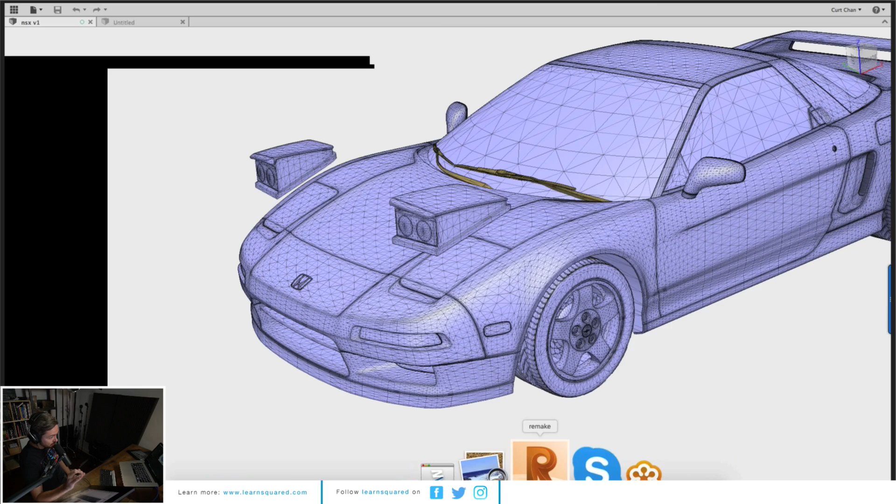Are the dimensions and everything fine, like to the T? Just scale? I don't know. That's what I'm saying—like if you have a properly designed vehicle to the blueprint, versus someone just working with references and trying to eyeball it.

Yeah, because that might be a problematic thing, especially if you want to build something for manufacturing. You're going to build something that looks cool on the model, then you print it out, and it's like 3 inches. I'm like, hey, what the hell?

Yeah, no, that's true. I have a question in regards to that, Curtis. What would be a general approach? I can assume car manufacturers would have CAD files and everything, but for a regular consumer, it's not available. So do you think, as a consumer who wants to do it for fun and play with it, would you go with scanning, or would you try to find out if there are CAD files for specific parts you want to replace?

Yep, so I think the first thing is, one, get the CAD file, because a lot of these manufacturers will have it. But two, a big thing I'm starting to see a lot more, and that we're starting to work a lot more with, is some of these partners that do a lot of 3D scanning. This is a big focus for us going into this year specifically.

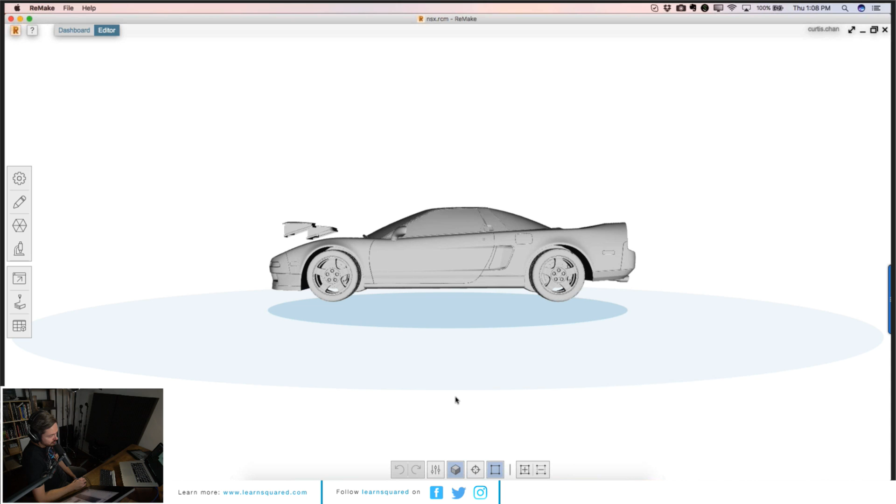So at a high level, when you look at Fusion, there's a couple things I'll talk about today, from our workspaces: model, patch, render, animation, simulation, cam, drawings, and then this other one we just put in that's available to certain people out there, sheet metal, and design, if that's of interest to anybody. But we do have a preview of that.

The other thing is, if you drop down and turn off 'Do Not Capture Design History,' say continue, this now opens up another workspace called Mesh. We've taken pieces of Mesh Mixer and put it into Fusion. So now you can take your models, reduce the mesh, change the mesh, repair the bad geometry—do all these things now inside of Fusion, rather than using Mesh Mixer or Remake.

Remake comes into play at a different level. The goal is to eventually have a lot of these functionalities incorporated into Fusion, because long story short, Fusion is the future of Autodesk in regards to manufacturing. It's considered a platform where everything else will plug into Fusion at the end of the day—just like what Adobe is doing, what Microsoft is doing. This is our platform for manufacturing.

So I think this is going to be great, Ash, for you to dive in and mess around with. Instead of going to Mesh Mixer, just bring parts of the files in here. Let's remesh it, let's reduce it, let's fix bad geometry. You can do some of that stuff here.

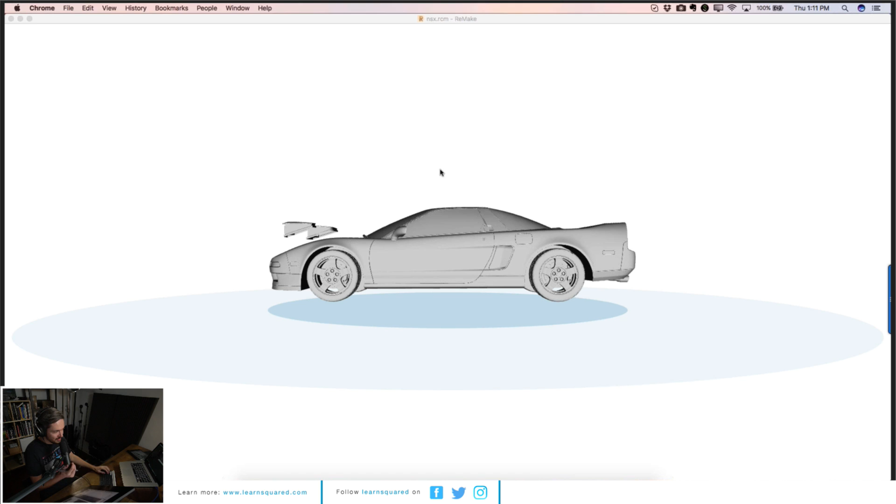Show me, Curtis, show it to me. So from an avenue of relationship it would be great too. Yeah, I'd love to talk with him. These guys are cool, taking old school stuff, scanning it, remanufacturing it, and he's paying a lot of money to have the scans done.

You could just do it with like a photograph, right? It comes back. He was doing it with sand while he was on vacation, took a bunch of pictures of sand. Yeah, he was showing me.

I've seen the handmade Broncos and they are so expensive. They run anywhere between minimum, I think, like 150 to 240. But they're immaculate, it's beautiful, kind of like a Singer Porsche. Singer Porsches are really expensive too, like $250,000. I think Joe Rogan had him on the podcast. He was on Jay Leno's Garage too.

He's now working on a special project where he scans an entire car, scanning bumpers, re-engineering it inside of Fusion. This is where we've paired him up with one of our product managers on the remake side of things, figuring out how do we work better with scan data, because we just don't do it fantastic.

We do it on like, let's just scan this stupid knob. But as you talked about, with this car, I want to take it and break it up and work with it and do cool things with it. So it's not there yet. Customers like yourself, customers like Icon, this is the envelope of where we're trying to push, figuring out how do we take people who master mesh data, master working with OBJ in the engineering world, when people are like, why would I even use something like this?

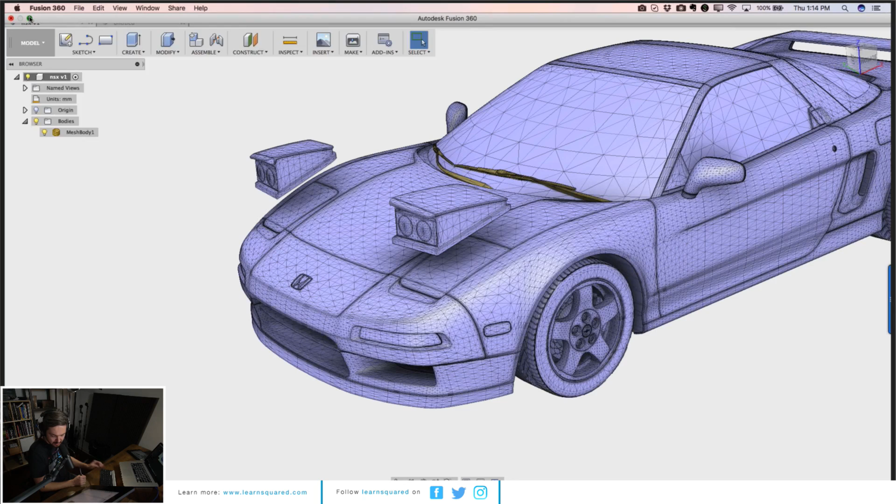Oh, that guy? Yeah, he's doing a lot of pew-pews.

Basically, Fume is like this—it's basically bringing Instagram to your desktop. That's cool. Instead of you doing all the posts and whatever you want to do, you can do it all integrated right here. But I think it's 3D.

The nice thing is, because I know you guys are using—I don't even know how to spell it—3D Picasso. Let's do a search right here. Of course, when I want to show it, it doesn't work.

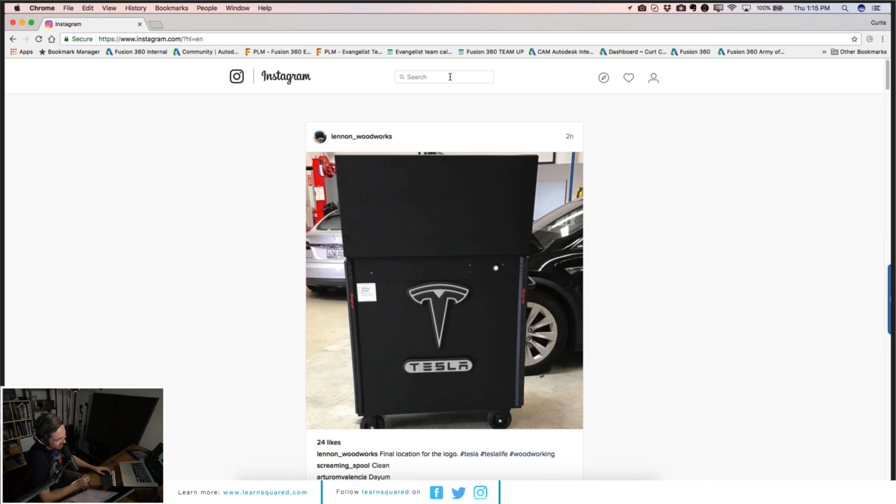Yeah, what are you trying to sell here? Nothing, actually nothing now. 3D Picasso. There he is, so, Sergey.

The only reason why I'm giving it a push is because, like how you guys talked about all this, everything is done in Fusion. Like all his prop stuff, all his guns, everything is done in Fusion. So he's doing some hobbit pipe. But it's nice to know that. Damn, pew pew, fucking killing it. Literally, he's killing it, dude.

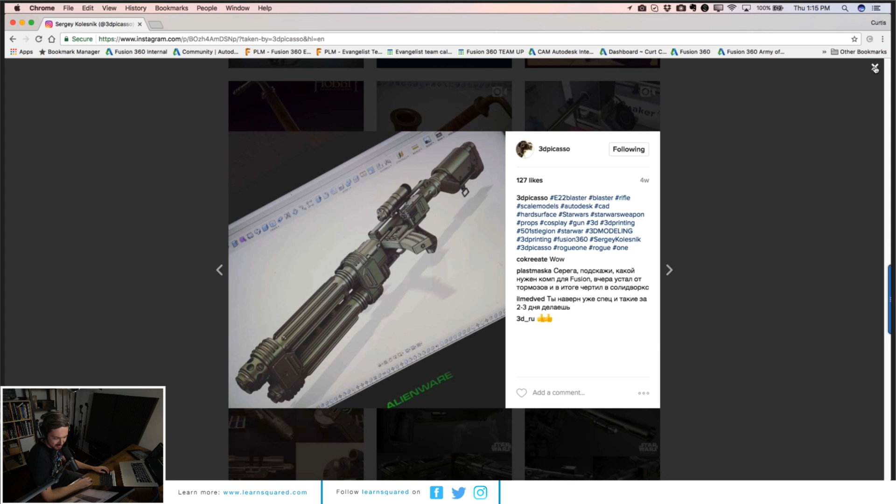Sure, so anyhow, get it. Maybe Momo, you can help us with that. We can get him on the stream and have him share some hotness with us all. Yeah, because really, that's what I want to hopefully do is bridge the gap.

Like whether it's taking photos of my car and then bringing that scan data in and using that as a base surface to put mesh onto. That's really what I want—I want to be able to rapid prototype and do whatever I want in here. And that's the biggest gap, because if it doesn't have it, I've got to go back into the polygonal model and wait until it's ready.

So yeah, I think Papa needs it, Curtis. Papa needs it. I think, even I think will be awesome too, is Natasha being on and showcasing—hey, taking photos of your car, putting it together, stitching it all together, and then creating a 3D model from it that you can actually use to reverse engineer. So down with that, yeah, let's do that, dude.

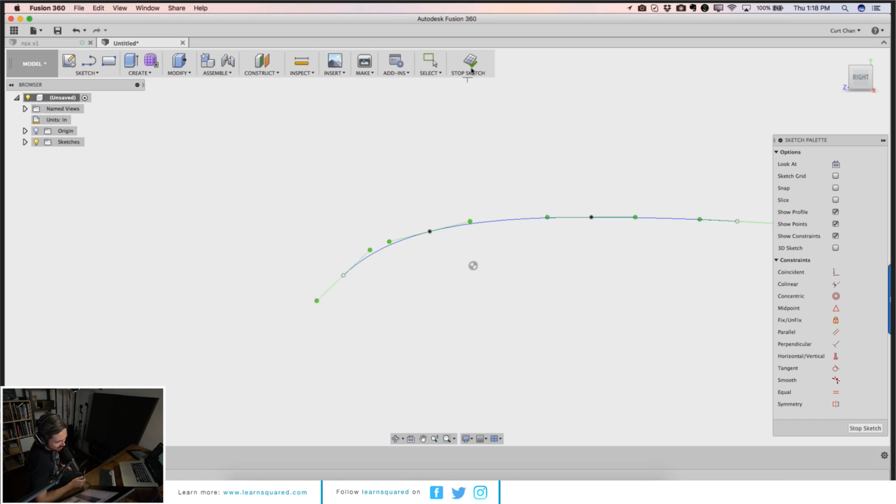But okay, so it's not here yet, and I blame Curtis solely for the lack of its ability. It's because the shortcuts are missing. So Curtis, you go to these meetings and just go like no. In reality, Curtis is just there on the meeting and one of the developers says, hey, I had this brilliant idea to add shortcuts, and he's like, no.

Dude, oh man, I won't get into it, but it's just like, I forgot the other day because I spent so much time on the CAM side that I'm just like, so we would rather split the triad from move and translate off than fix this bug. Okay. So nobody wants that fixed. Okay, and that was more important.

It's just, and you can't blame anybody, right? It's end of the day. Blame him. I know, it's so easy. I do. I'm lying to myself right now. I'm lying to myself. Joking. No, but it is messing around. I'm sure you guys are plenty busy. Well, we're just totally joking around.

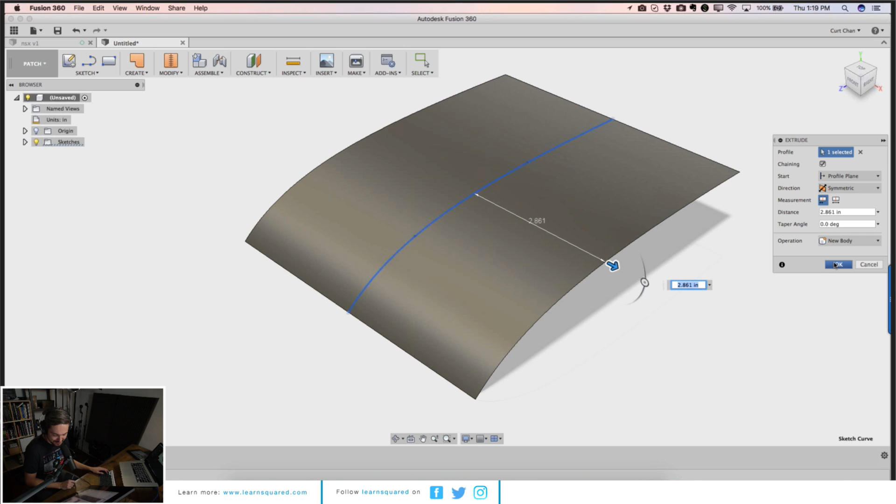Yeah. But the moment that we get access to these things, I mean, one thing that was happening over the past couple of weeks, one of our buddies, Vitaly, I think you're aware of his work now, right? I think he showed fantastic work. Yep, he's amazing. But he uses MoI, and I was like, blasphemy. Can you show me your workflow with moments of inspiration?

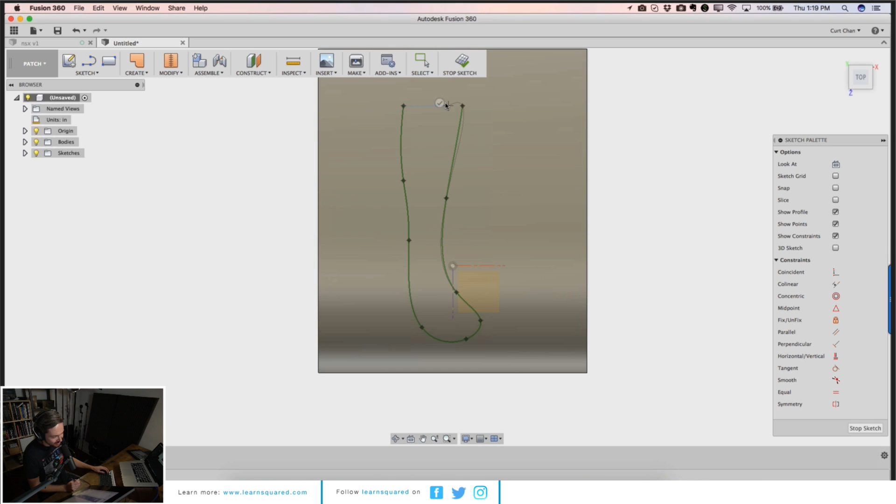And he was showing me, and I was like, dude. I had to take it with a grain of salt because part of it's Vitaly, of course, and then the other part of it is. You mean part of it is he's secretly working for Skynet? Yeah, that part. He is Skynet. The part where you get a call from directors saying, "Why don't you work as fast as Vitaly?" and you get totally embarrassed. That kind of part. Yeah. Keep going. Like, hey, hold on. I can't help it that I'm inferior to him.

But yeah, so he was showing me the keyboard shortcuts, having all that kind of stuff really quickly. It was his workflow. The amount of time that he wasn't traveling with the mouse was really epic. I think with manufacturing it totally makes sense to take your time and be very methodical. But when I was watching him and how rapid he was making things, I was like, oh damn, I have to work at this speed. So I think there's definitely a way to do it here, but it's just a matter of trying to work out that magic.

It's a big thing. From a design to manufacturing side, we have people that monitor the amount of mouse clicks they do, because the more mouse clicks you do, the less productive you are, even in programming a part to manufacture, right? Yeah. So I hear you loud and clear. I think the biggest hurdle is, how do we have these shortcuts travel with you to each workstation, right? It's not a matter of, let's do it.

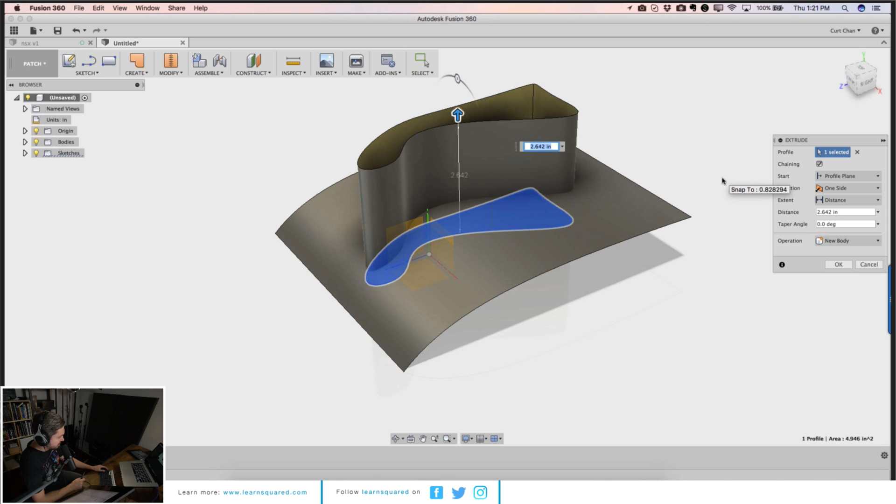Could it be like an attachment to your login data? So it's something small that would just be part of the cloud? Exactly, and that's what we want to get to. Should be pretty small though, like kilobytes usually, and you have workspace setup, because it's just text data. 20 kilobytes. Yep. So super, right? So we did that today.

We just did an update about a week ago, and what we've added, from a manufacturing standpoint, is something called assets. When you create templates, specific custom tools, whether you're working with certain vendors or you have your own machine, or even certain post-processors that communicate with CNC machines or 3D printers, those will travel with you now. So just as you talked about, Ash, that should just travel with your login. These assets will travel with your login, right?

I think this is the first step in getting those custom shortcuts, because these are assets that will always go with you wherever you log in. The goal now is to have that extra one that might just be the shortcuts. When you go to a new PC, you just right click and say apply, like a template, and it drops it all across your keyboard. As it should, yeah.

At the end of the day, it's a mixture of things, right? Because we're having our browser-based Fusion come out, preview on February 8th in a couple days. So you don't even need to download Fusion. You just log in like your email account, and now you have access to do a lot of this stuff.

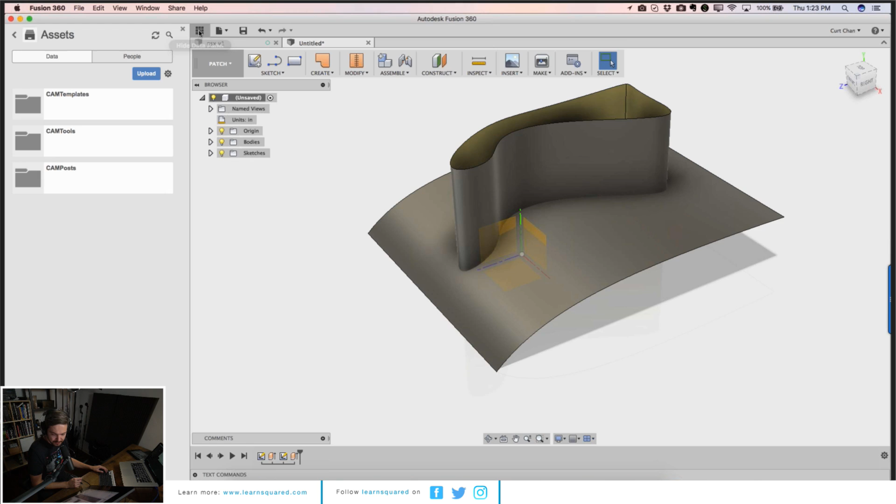So when I get a hold of it, maybe the shortcuts might be attached to that, because physically you log in somewhere on a server and it's there. So more to come on that, and hopefully next time I'll showcase some of that functionality too. Yeah. Awesome. Looking forward to that. Yeah. So a lot of good stuff in the pipe, right? I think from a manufacturing standpoint.

Yeah, exactly. Damn, dude. Just led me to slide that one in. I know. Right. The soundboard, man. Damn, Daniel. Damn, Daniel. All right.

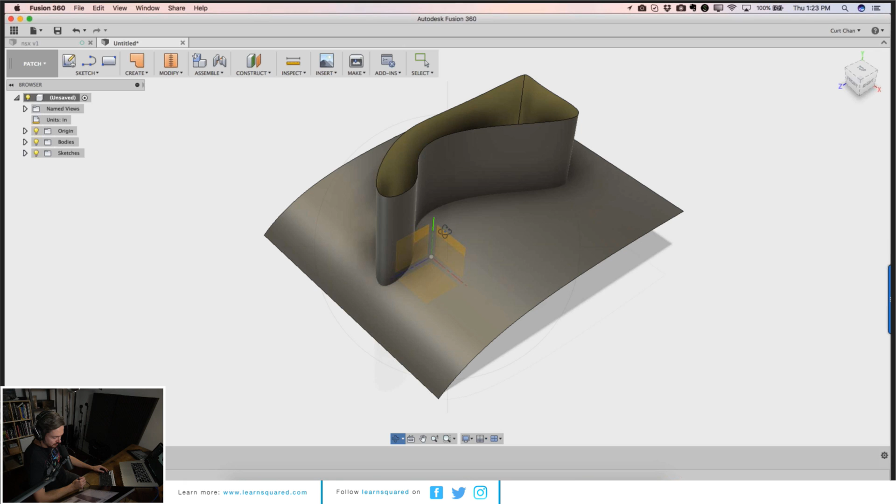You look like you're getting ready to show some cool stuff. I was just curious too. How would you go about the process of, say, roughly modeling a fender or something that's a little bit more organic? How would you go about making something like that? Would you import photographs? Would you just build abstractly? This is just for rapid prototype's sake, not for manufacturing. So it's just more or less jamming away.

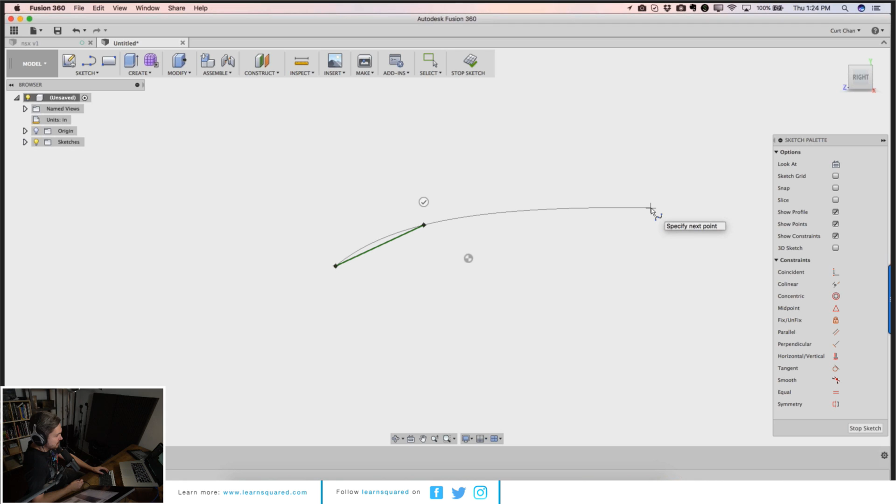Yep, totally. So in this example, I wanted to show how you create something like that fender. If we look at how this kind of bows in and comes together, there are a couple different ways of doing things. For example, I can start working with surfaces. So I'll just start fresh here, and I can get the curvature I'm looking for. I created a new sketch on this plane here, and I'm going to start with a spline. This is going to be the main piece you want to start with. I always love to work with splines when it gets to more organic shapes for T-splines.

Have you messed around with T-splines a lot at all, Ash? No, I haven't yet. Okay, cool. So I'll talk about a couple things then. From this perspective, I can take this curve, like if I'm looking at the car section from the side. If I go bottom and then rotate around, you see how this kind of bows in like this. If I look at that perspective on the other side of the car, I can think about it as, let me create

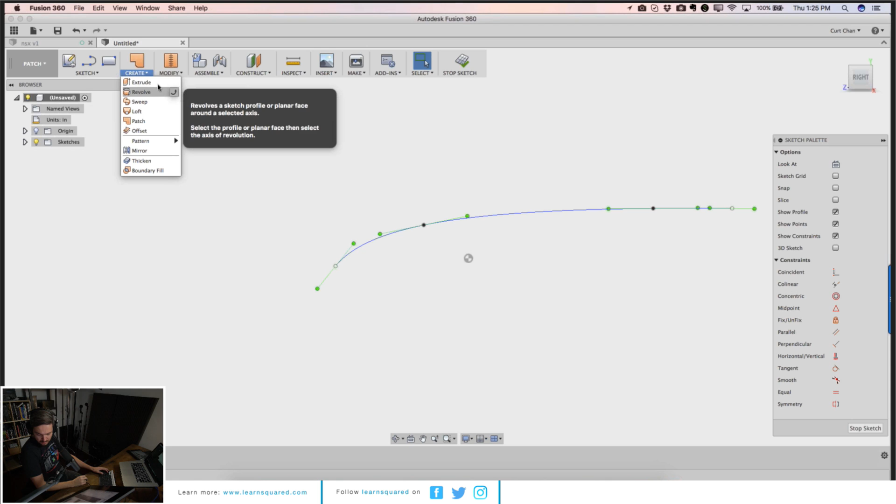under Model, drop down to Patch, and just do a quick extrude surface on both sides, with some random numbers here. But I can take this curvature and then take some geometry that I want for my shape. Now let's go ahead and create how we want that curve of the fender to look. We'll just go something random right now for demonstration purposes.

Are you making Gumby over here? What's that? Yeah. How dare you, Curtis? I know. People are judging you right now. Quietly on the chat. Yes, I know. Like, what is this? This is Gumby? I love Gumby.

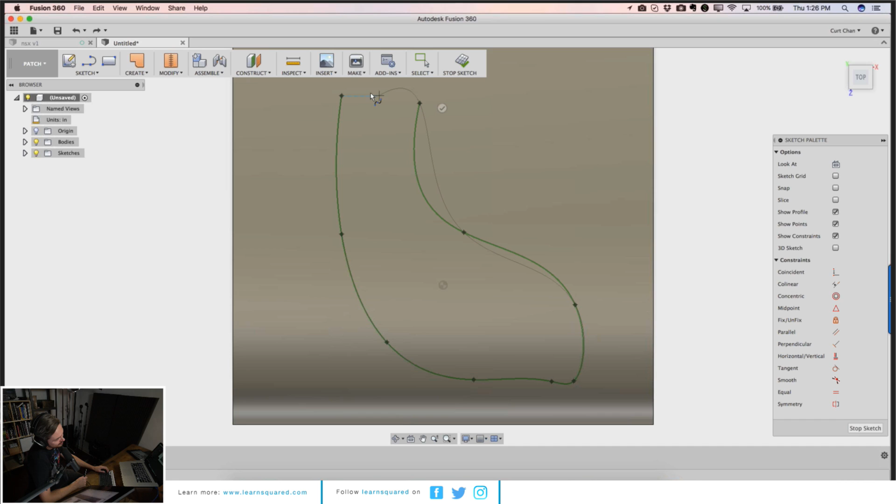Is it possible to snap those to get a hard edge instead of having it be a bezel? With a spline, it's a little bit different. What we can do is take the geometry and add constraints. We can say make this coincident with that, and that will snap to it, and then we can change how we want these tangential points to look. But to make a long story short, if I took the geometry and did a quick extrude of

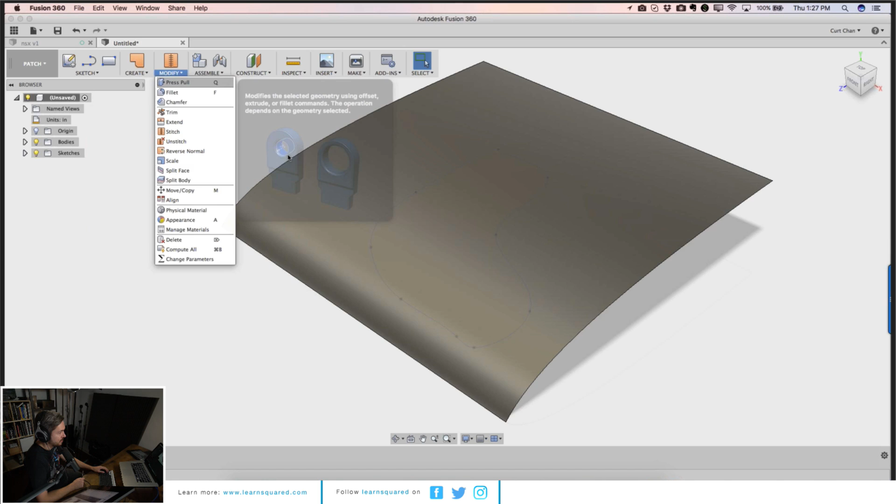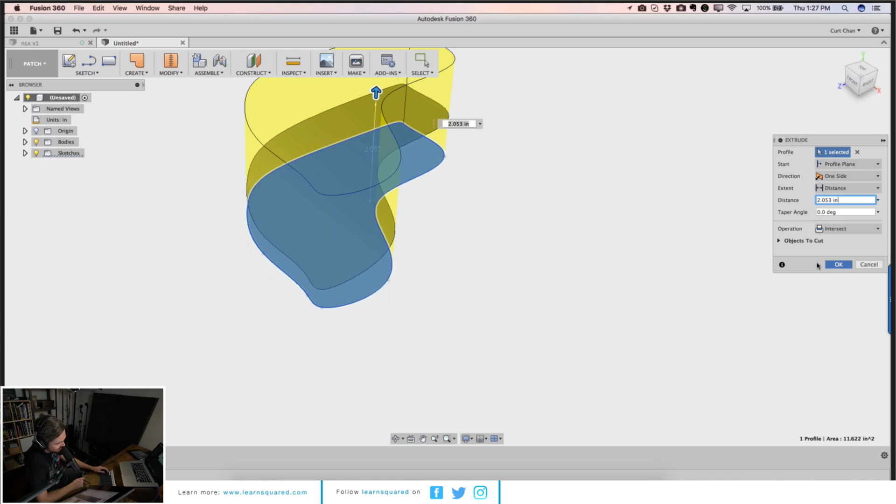this piece, instead of doing a new body, let's do this. Let me press pull, grab this guy and drag it right through. Instead of doing a join or a new body, I can do something called an intersect. What this does is find the similarity between both of these bodies. Okay, that's cool. Let's grab this guy and move it around, and now I get the shape that I want for this fender, or whatever the fuck you want to call it.

Gumby. But the key though is this is parametric, right? So I can come in here and turn on these splines to start giving me the curvature I want of how things need to look.

So I think this is kind of the value-added part of where you get some of that flexibility now of things to look, right? But now it's more or less, can you change it on a third dimension now? So you have it on that one plane, then now you have it on two planes. Basically, you have an adjustment. Can you do it on a third plane of adjustment now? So let's see, you have the Z, X, and now we do the Y, I guess.

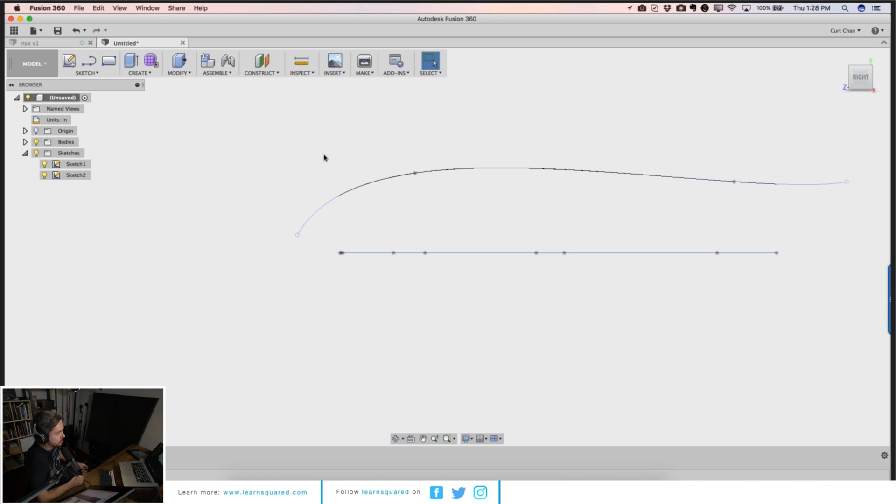Totally. So what we can do, and let me try this out, is if I actually came back over here to model, if I did something like this, I'm going to try this out. Under T-splines, actually... Wouldn't it work if you just take a sketch and move one of those points in an upwards direction instead of just sides? I think that would change the geometry, right? Or it would, but it's not a 3D sketch. So that's the problem.

Let's say if I want that physical face there, and I totally know where Ash is going with this. So if we took... You could adjust it at any plane, anywhere. That'd be great. Any plane, anywhere. I think today it's only going to be 2-dimension, but I want to just try this out really quick to see if this is going to help us. So if I did sculpt sketch stuff somewhere, and then it's kind of...

You need me to go over there with the bat to your headquarters with you, with the Lost Boy goggles on. Gosh, right. Totally joking. You guys are doing that thing. All those manufacturers support Learn Squared instead. We want to make stuff. Stuff that doesn't matter. We want to make that. Meanwhile, somebody's trying to make a heart or something. We don't care. We want to make car parts. Seriously. For archaic machines that will be extinct soon enough. Damn it.

I think I know what you're talking about. It's similar to how you would do it in like a polygonal, basically, where you can move it from a spot. Curtis, you can take the bottom sketch, for instance, the shape sketch, and then move some of those points upwards, right? Can you? Yeah, I don't know, because it's on that plane. Let me actually try. That's the problem. There's one that's called... Let's see here. It's under direct modeling, I believe.

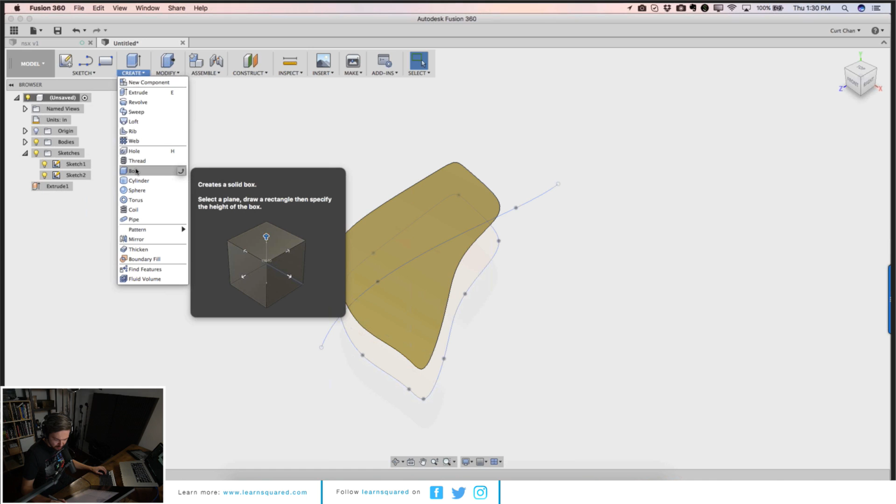Dude, I know it, man. The hard surface stuff totally makes sense to me now in this program because it's epic for hard surface. But now if I wanted to make something somewhat organic, it's like, whoa, how do I figure that out? Because that's a whole different dimension. But I think if you can try it. Yeah. Let me try this. Papa's gonna try it.

Oh man. Let me try this out. So if I took this face from a solid model, and then we came across and we did... What did you do there? Was press pull, right? Yeah. Where is it? Create base feature. That's what I want. Then in the create base feature, I think I could take this face and then do edit face. I did edit face. So edit face converts selected faces to T-spline. So this is how I think it's going to have to work.

It's if I just switch. Oh, the press pull doesn't work? How did you do that again? You just grab the face. Q for press pull. So you select that bottom sketch, right, and you press Q for press pull. That press pull though. Shit. All right. Let's see. Did it lock up? I think it's just trying to do its thing. Stop thinking, damn it.

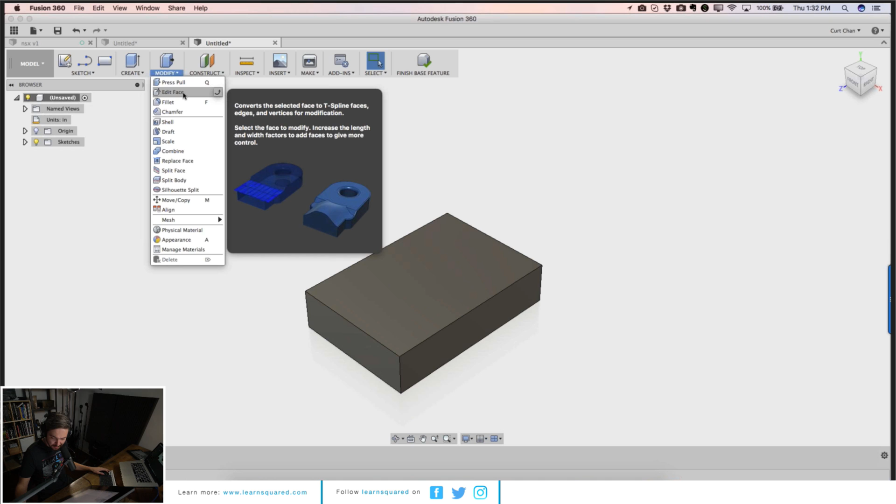So when you do a base feature, I think you were showing me one time all those abstract shapes and stuff before, like the soft bodies. Yeah, totally, I'll show that too. But I wonder why it's not allowing me to do it here. The edit face, where I could take a face and then finish base feature. Let's see if it does it. No, it's not going to have it here because it has to be in...

Yeah, nothing. Yeah. And this is me, I'm like, what's going on here? No, totally. It's freaking stupid. But it could just be my approach. What I'm trying to figure out is the best approach for this. Like, you mentioned some guy made the Shinkansen, the Japanese bullet train, in Fusion, and I'm like, well, how the hell do you do that?

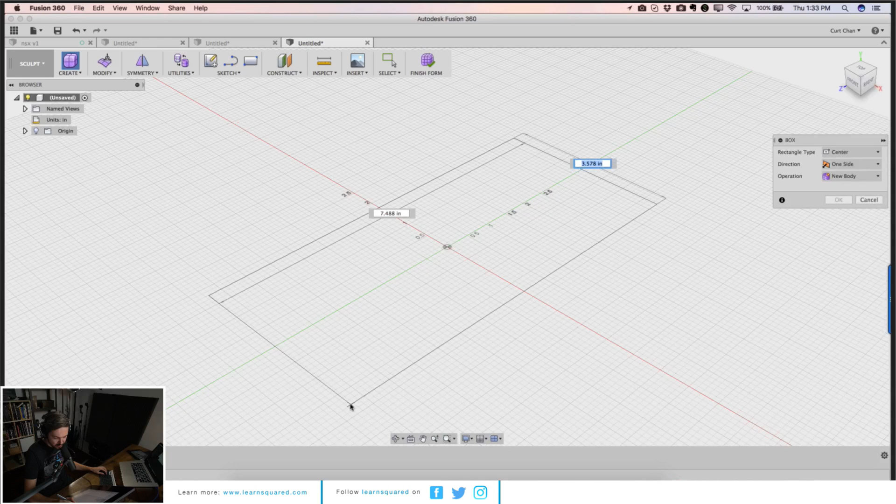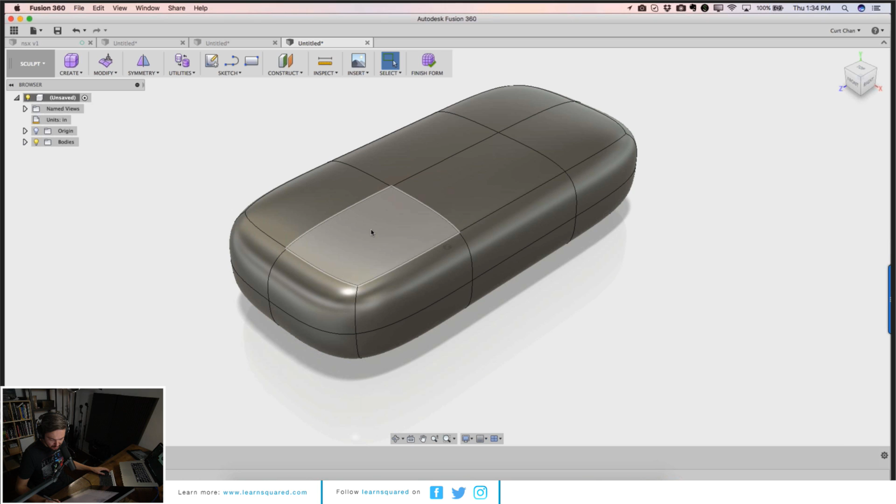Oh, totally. So basically, in that avenue, you would want to use something called T-spline modeling. Yep, create form. So what this does is now it allows us to come in. Let's say I start off with some basic geometry, these are all T-splines that bridge together. So this is supposed to be a box, but it's more of like an oversized Twinkie, right? And if you look at the design, the more T-splines I add, the more definition I'm going to get, right? Like sub-D modeling, yeah. Exactly. But the nice thing about it is that it's a watertight solid, right? So anything you do, it's just more of the flexibility you can get from it.

So who else I should have you guys talk to is our sub-D modeling guy. He actually came from Alias and now manages the entire T-spline section of Fusion. Yeah, so bring that guy on. I think he'd be a good guy to have on too. What's his name? Colin Smith. He's based in Toronto, man. So you're even closer to Momo. So Momo is going to drive down to see Colin tomorrow at 12 o'clock and drag him to the stream. You have to physically drag him to an online place. That'd be epic. No, it'd be really great to have Colin on.

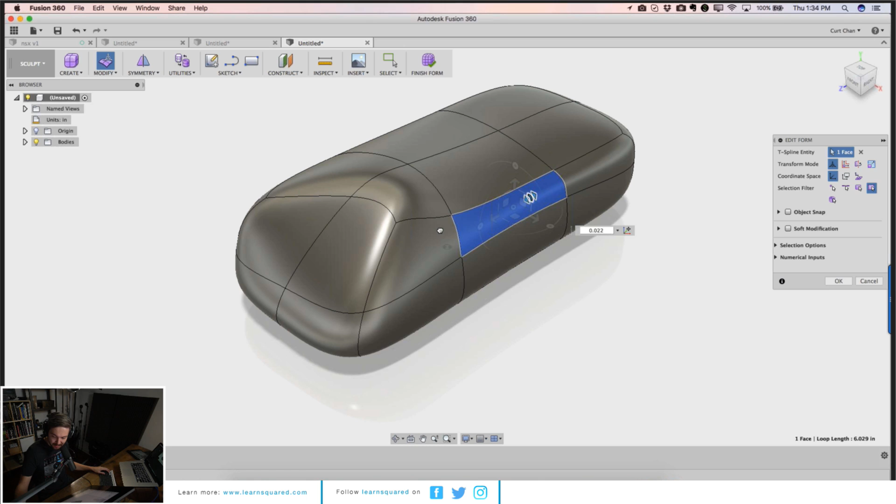Do you want us to keep track of this, and we'll send you an email after with all the people? I have a notepad here. I got it right here. Oh, you got it? Okay, cool. Yeah, I got Natalia from our ReMake team. Talking about that would be another great Twitch. That'd be awesome. And then Colin Smith would be another great one too from T-Splines, and he does T-Splines and rendering. He manages both those products. Killer.

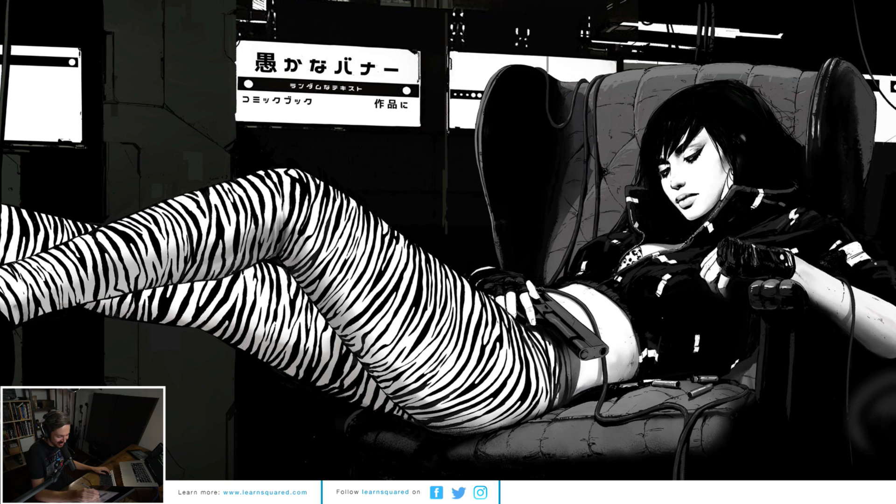Curtis, you need to help me here. How do I press pull? Can you show it? You want to make me the presenter so I can see? Yeah, make it the presenter. Can you see it? Yeah, I can see it. So yeah, press pull, right? Where do you press? Press P. Oh, P is for project. My bad. The Q. Is it Q? Yeah, so Q, and then you want to select the entire face. Yep. There you go. There we go. Okay.

Gotta wipe your butt now too? What's going on here? Curt's just showing me some sweet hotness. I'm just joking. No, that's one thing I run into too. Sometimes I'm like, damn, how do you do that one thing, or that little bit? Yeah, totally. Oh, I gotta make you presenter again. All right, here it comes. Here comes the pressure.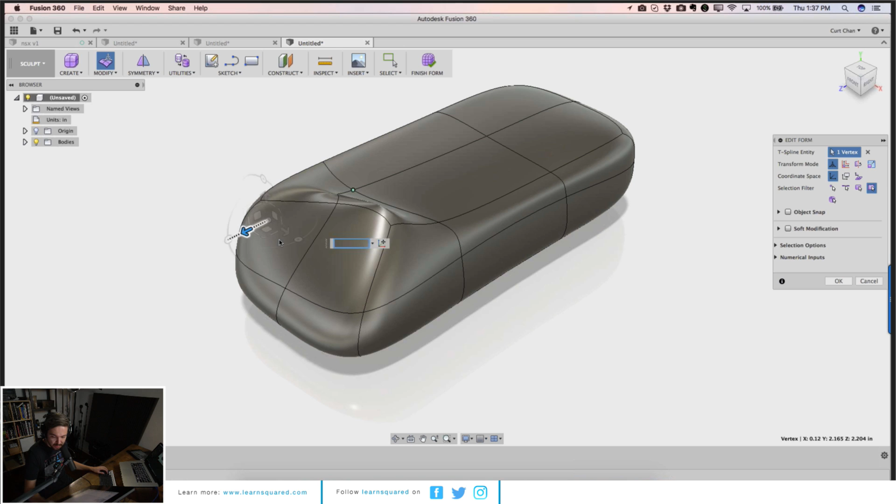Mohammed, have you played with Fusion much yet? No, I'm still trying to figure out traditional poly modeling. But I use Modo, and it does have MeshFusion, which is sort of similar to Fusion, but I think not as efficient. Yeah, I haven't used Modo yet. I know what we can do here. If you create another sketch and then use a sweep, wouldn't that work? That would work. I think it would.

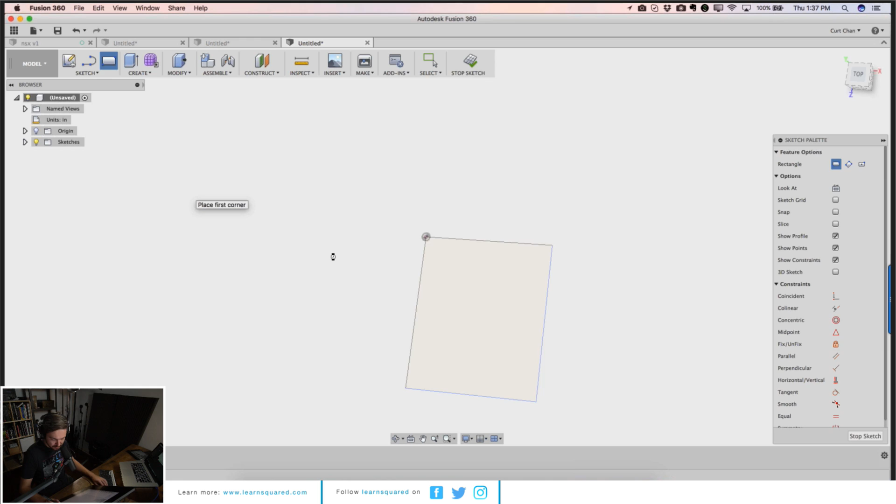Let me see this nonsense real quick. Do not capture design. Oh, what in a Fusion? Seriously, right? Edit face. Damn it. There we go. So basically, let me show you this now. This is where you can hybrid this. Okay. So basically, if I took, once again, good old rectangular box here, and Q for press pull on my keyboard, a shortcut. Okay, got the shortcuts there. Yeah.

And then basically, you want to turn off your design history, meaning that when you say do not capture design history, I'm going to come in here, and now I can modify. You have something called edit face, which allows you to take this parametric design right here, take this face, and add T-spline geometry to it. So I can do something like this, and now see how it changes that parametric design. And then I can come back over here, back to capture design, and there we go.

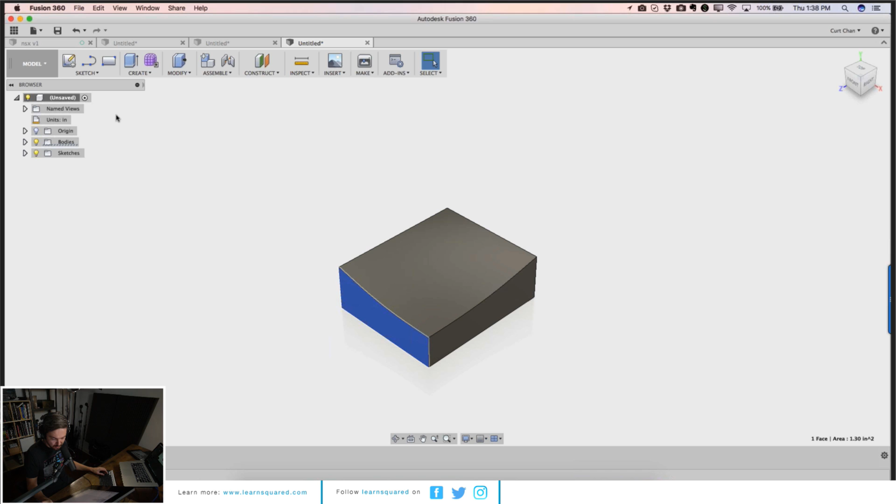I see. You're just faking it, basically. Yeah, exactly. The problem is it saves an iterative part of history, so you have to be really precise with what you wanted originally, right? Because then you can't go back and change it. Well, yes and no. It got me spoiled on that parametric, just adjusting it on the fly.

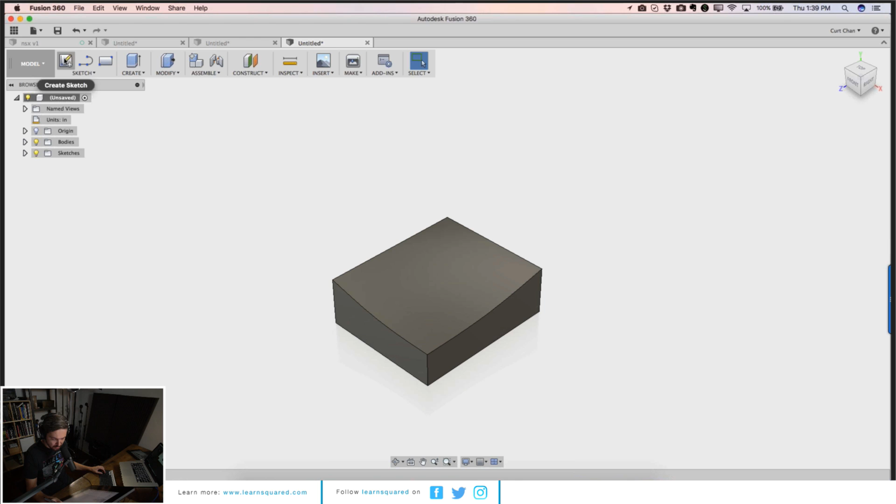Yeah, dude. So that's the problem, once you do it, if I say finish base feature and I go back, do not capture history, there should be a way to, what I wanted to do was, if I had this face, you do something called create a base feature, and this basically says, at this point, let me do non-history based stuff that's captured in this base feature. So you saw before when I said do not capture history, all that history went away, then I came back in and it was still all gone.

What base feature should allow you to do is come in and apply no history at a certain point, but I think something's up here. It's not letting me do it whatsoever, which is stupid. But it's kind of like, here I can still use parametric, then say pause, let me do some organic stuff, then go back to parametric, but still have all my history of the parametric stuff. Not saying, oh, I want to make a certain tweak, now I've got to throw away everything I did parametric and start all over. That's where it allows you. I'll show you guys some stuff with that next round.

Okay, cool. Yeah, that's it. What else is up, dude? I think sweep would work. Did you get sweep to work, Little? Let me see, because I disabled design history, so it was kind of defeating the purpose. So I'm trying it again, I'll let you know in a second.

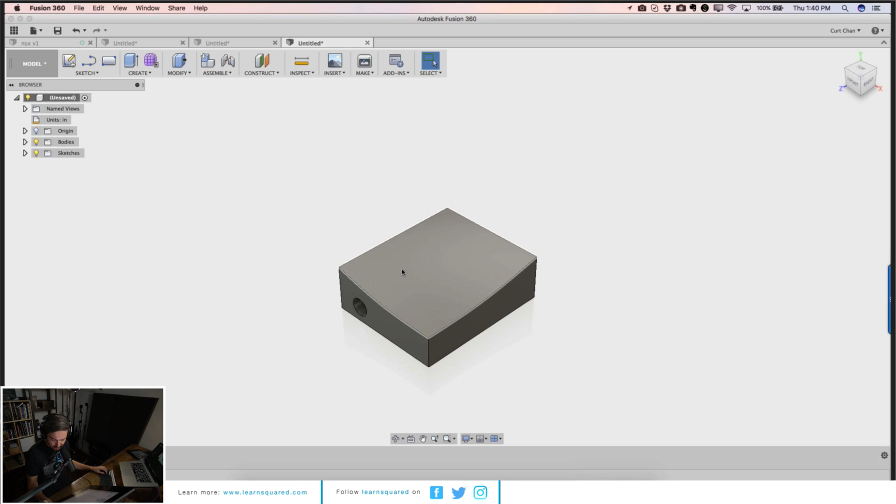Sure. What else you got going on, Curtis? What other magic you got in your bag of Fusion tricks? What's new? Dude, we got a whole bunch of new stuff. Have you guys messed around with some of our collaboration stuff when you start talking with customers? For example, let me open up some stuff here real quick for you guys.

Open it up. Damn it. Open up all your NDA top secret stuff, I want to see that. Do it live in front of everybody. Okay, broadcasting. You too, Maciej. Right click open that, right? Where's this server at? It's in Mexico, actually. It's in Ottawa? Mexico, Ottawa. Get out of here. No, you get out of here. All right, I'll get out of here.

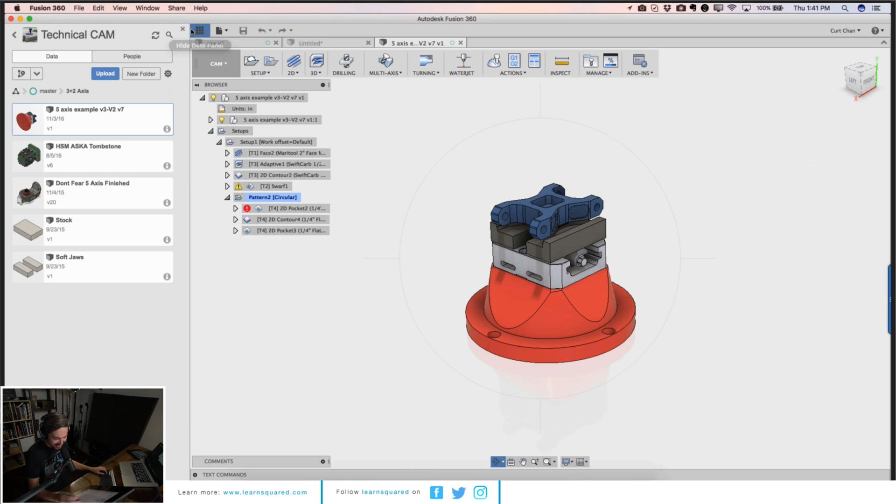How do you change the material color? Like this, my friend. So basically, under the models, hit A on my keyboard for appearance, and I can just come in and grab metal, aluminum, and let's make this diamonds. There we go. Sweep doesn't get through the history. Doesn't get it? No. Unless.

Hit sketch. Cool. There we go. So maybe that's the next feature, that's cool.

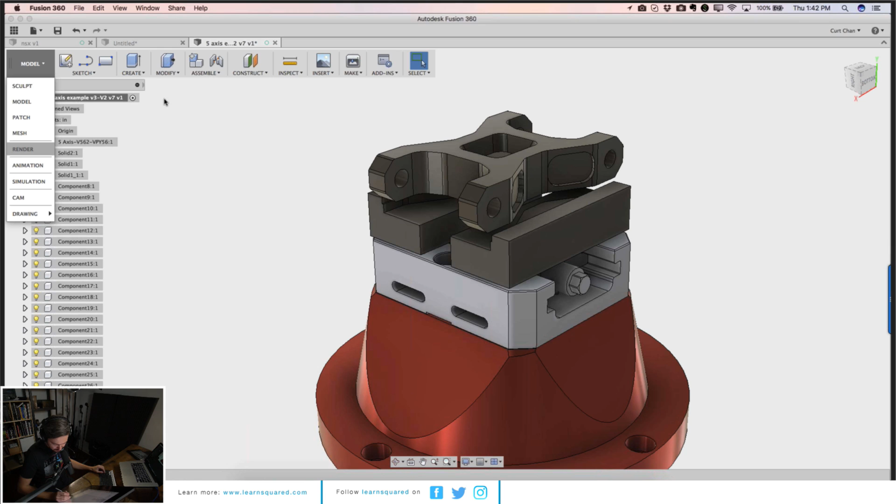So M and A for appearance. Okay, yep, M and A, and then now we could just hop on down and do under render. So we do now local render, depending on what product you want to use. But I'll just do it in canvas render, and I think the lighting just blows. There's one light, one light. We'll just leave it for this right now.

But as of now, what I wanted to show you was I can actually take this from a collaborator, and this is great if you're working with anybody.

I can right click and say start a live review session. What this does is give you guys a link, and this is where we can actually collaborate. You can do markups, take control, point at certain things, and I'll throw it in the GoToMeeting. You guys don't have to have Fusion installed or anything like that. So the nice part is you can just have someone take a look at your design and get some feedback. I'll copy this link for you real quick, you guys open it up, drop it in, paste, click on that, and type your name in. It'll bring up all this data, and then I can give you guys access to giving me feedback on my designs.

Oh, I will, just joking. So messed up, it says oops. Maciej, I'll let Maciej in, he's gonna start art directing you. He's like, let him in. Let me see, this is actually really cool. You'll see your names when you guys click on that. It should pop up. My browser doesn't have WebGL. What? Daddy, what are you using, Internet Explorer? Get out of here. He's using Netscape Navigator, please.

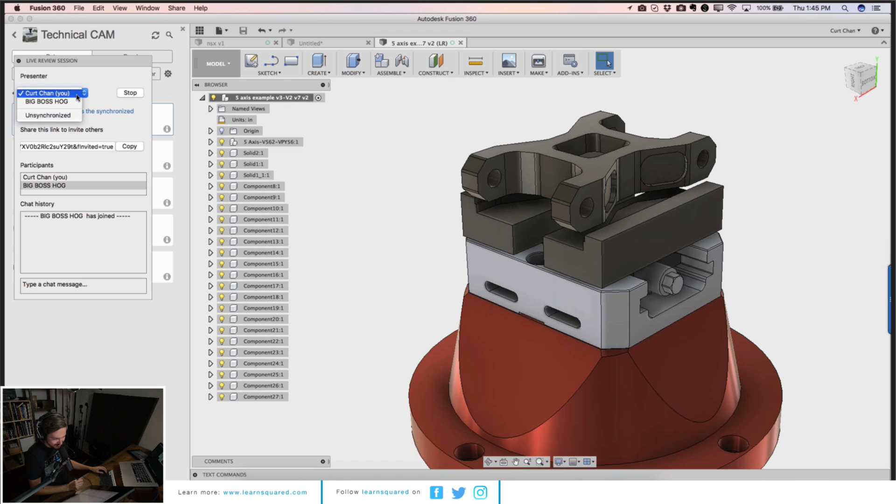This is the most organized and legit live stream we've ever done. This is sick, Big Boss right here. So you have joined, I can actually give Big Boss Hog the control, and now you can move my model around, and you'll see on my screen.

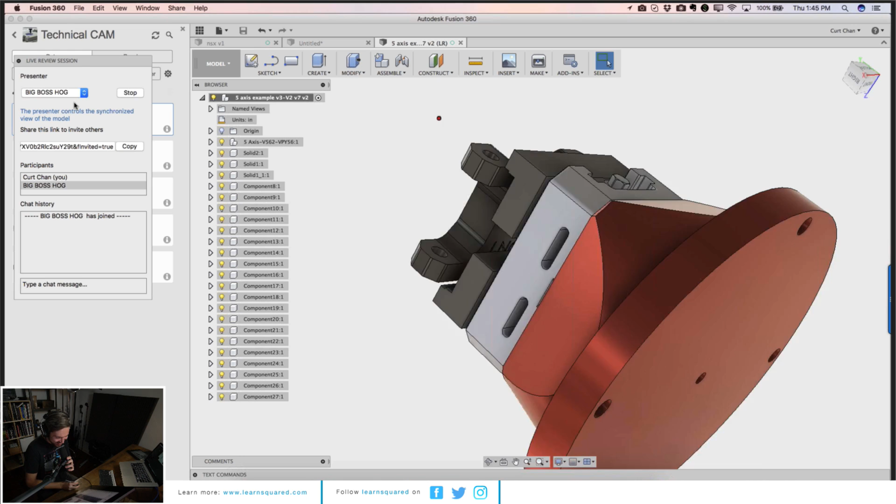Whoa dude, this is sick. This is so rad for working with teams on prototyping. Yeah, you can really see some of the options there, like I think you can point, comment, add a comment, and do all that kind of stuff. So you can make comments and stuff? That's awesome, that's cool, you can identify things. And the cool thing about this is you don't have to have Fusion on your system, let's say you're using your laptop on the go, or your iPad or something, and you want to collaborate with some people. So I'm using the web browser to do it.

So I'm putting a comment on here. Where's that feature at, on the bottom? Hopefully it should be on the right or the bottom. Or we can even have a conversation, right? I can say, take a look at the mounting bracket. Nice, and then everything will be documented here, so you can go back and forth. And now I can move it. Oh shit, son, it's nice.

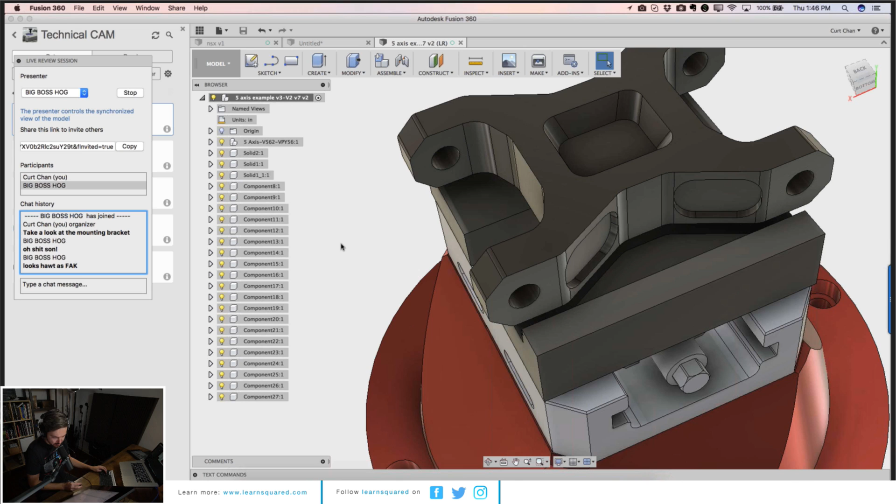It's a great way to collaborate, and this is only going to get better, functionality-wise, with comments, markups, measuring certain things, checking designs, all that kind of stuff. That's awesome, that's a really cool tight feature. Are people really gravitating toward this and using it? Yeah, big teams.

So I'll kill this too, I'll just kill the session. Don't end Big Boss Hog session.

So I can even take the share public link, and all this link does is give people the right to take that design, that version, and take a copy of it. If I just copy this link, send it to somebody, throw it in a web page, open up a new web tab, boom, no install, no Adobe, no OpenGL, none of that kind of nonsense. It will open up and bring it, and then you can look at this on your iPad, come around and start measuring your design.

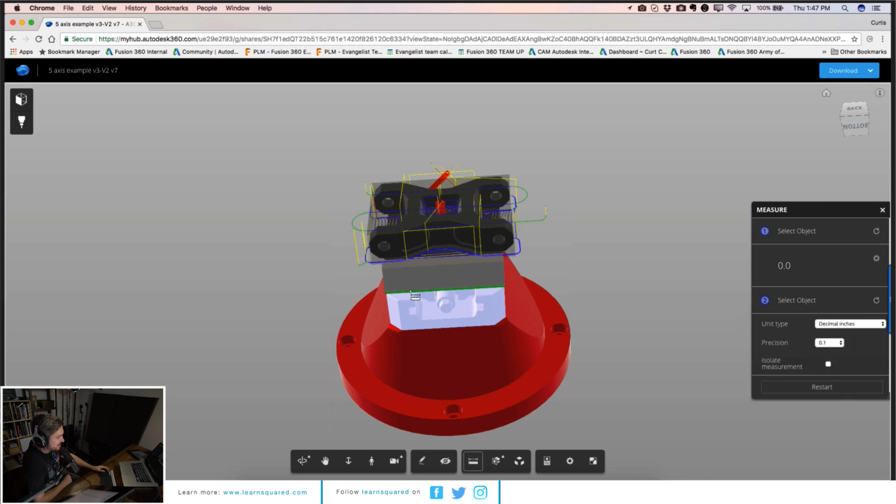How long is this going to be? What's some of the markup? Okay, well, I don't like this design here.

Change base. So nice. And all this is captured, right? So I can save it as a snapshot now, and that will get saved as a system that I can save and take off and use for a design review or something like that.

So I opt in to do a project together with you, Ash. Raw, twitch it raw with comments. Like we do this together on the project. Exactly what we're looking at. Yes, that'd be epic. That'd be so much fun. But yeah, I'd love that.

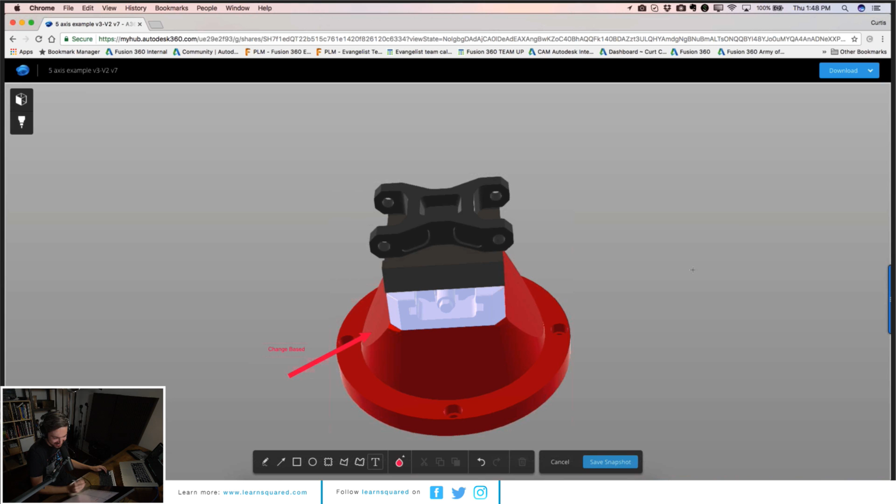Censorship. This balls out. We're just gonna make some sweet robotic penises everywhere. Super phallic with it. Ruin the face of Fusion. And Curtis is like, I don't know those guys. Who? Ash who? I don't know. Hey, what? I was just like, what? Come on, no, that's really an amazing feature. It's kind of like a really advanced version of Marmoset or something, for the big dogs, for Big Boss Hog.

So lame. Okay, so silly. So silly. Yeah, hilarious, my friend.

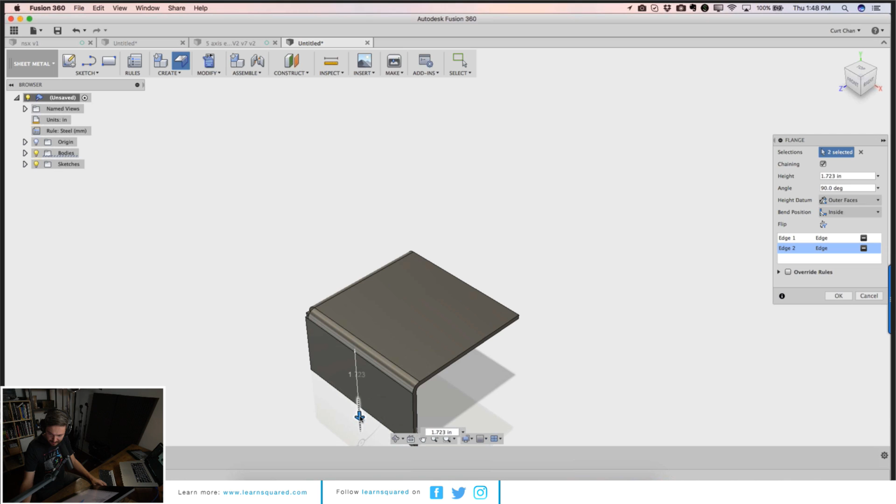Another thing too, sheet metal is in preview. So people that do anything with sheet metal now, we're getting kind of creative here on some of the things we can get into and whip up. We're really trying to take it from a manufacturing perspective of what's up, what do we want to do. How do we make anything, that's a big thing when you compare CAD features out there, how do we do some of this stuff? How do we get from the manufacturing perspective here?

So nice. I think I got it figured out. Oh, Jason, yes. Oh yes. Momo, quiet down over there. Jeez.

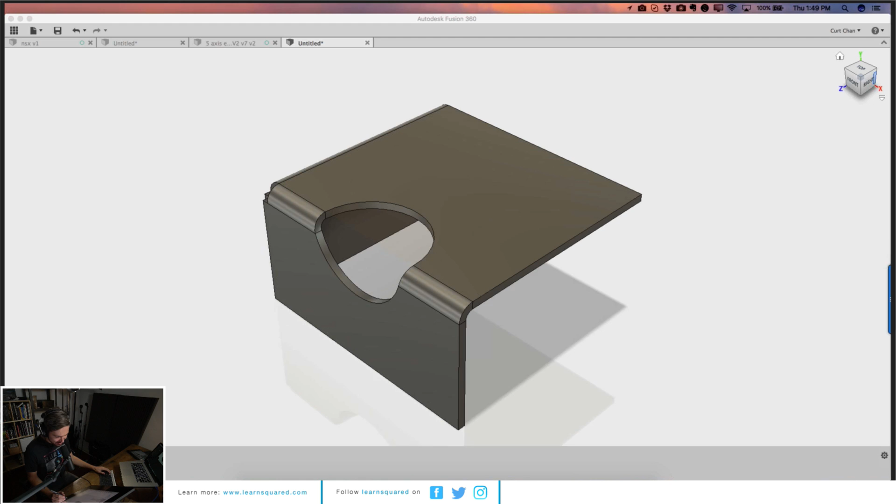Let me make sure that our people... Nice, yeah, you're doing it. That's what I'm talking about. So here we are.

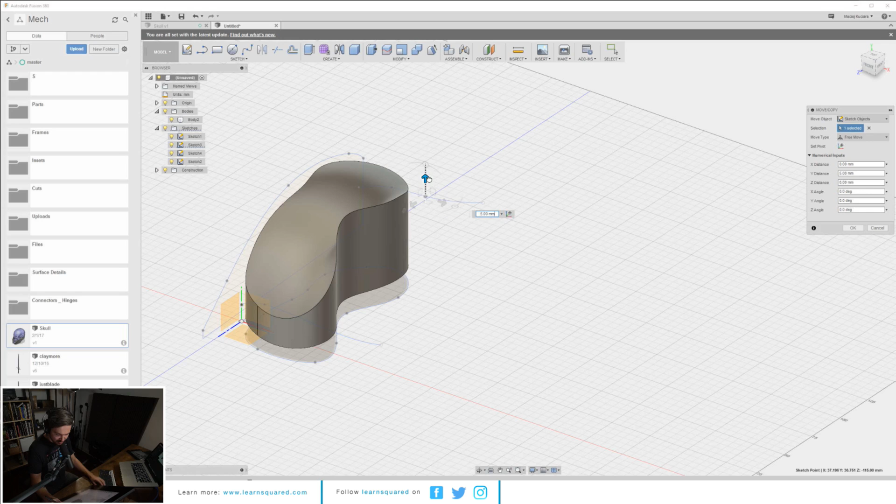Check this out, I select this right here. Watch out, Curtis, it's coming after you. Here we go, here we go. It's coming after your job, Curtis. Oh okay, yeah, you did it on the other plane.

Totally, yeah, that way you have a nice three-way modeling ability, which is three-way cuckoo cachoo. So you did it intersect twice then, or once? No, I did a sweep from the model, basically extrude this as a sweep on that rail right here, and then did the platform right here, the sketch, and then extruded it or press-pulled with intersect, and then it works.

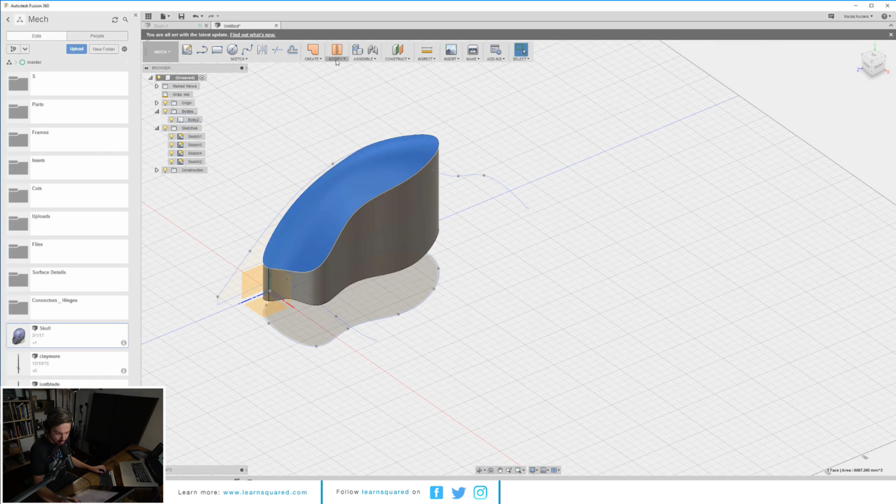And then here it's pretty easy, right? I mean, we can just go into sketch, patch, and unstitch, right? Is that how it works? Yeah, yeah, and then just delete those unnecessary surfaces. Nice, cool.

Nice, and I wonder if it's still gonna work. If it's just this. Yeah, there you go. Boom. It's live too. Papa figured it out.

Can you shell that too? Can you shell it or extrude it or anything like that? Yeah, of course, I got that. Boom, boom, so obviously there's restrictions how far it can go based on the constraints.

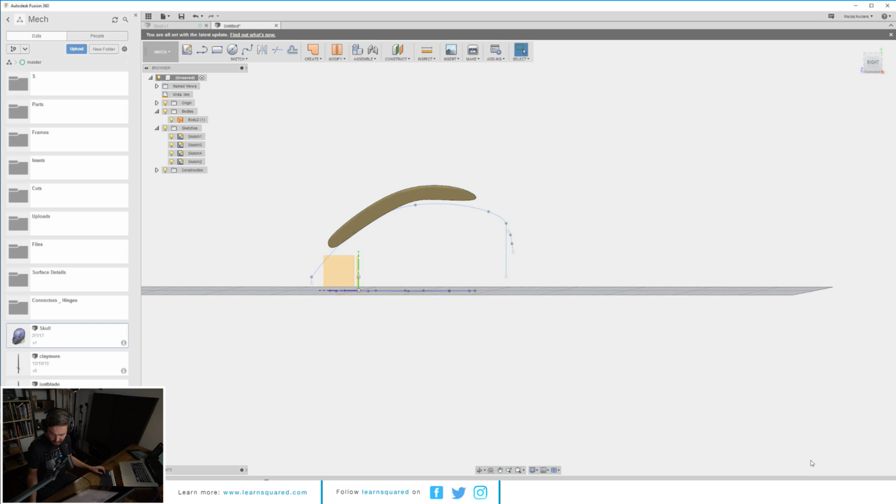All right, like there's a warning. It says you're stupid. Aw, hate those warnings. Yeah, well if you have more, there it doesn't allow me. No, anyways, I would just work with the... I guess I would just work with the body object and then only care about the surface. I'm pretty sure there's a way to figure it out later on. But that's like the world's worst mouse. It works though, imagine that being a mouse that you're using.

It's like all lopsided. It's like a high heel. Your hands all up.

All right, let me get you back. Let me get you back. Back to the future, back to the future. Make a presenter. There you go. Boom.

All right, so what else is up, guys?

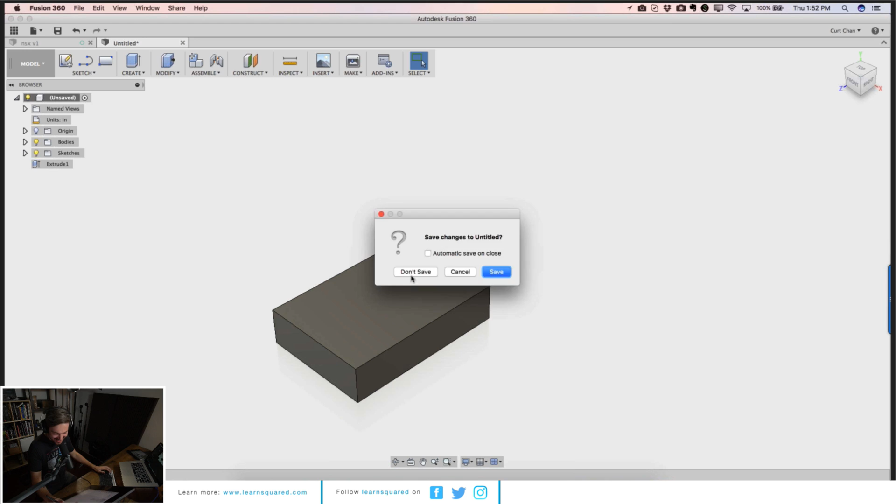What else you got, Curtis? I'm just curious about maybe any questions coming in from the field. I actually had a question because I wanted to do something else, but this guy here... Go, Maciej, go. There's no question in the chat. Yeah, we have no questions because everyone is just so impressed, like 'oh my god, I can't believe what I'm seeing.' Question, there's actually one question.

Just asking if there's a way to do low poly versions of your models straight out of Fusion. So the exporting, I would assume, something like that. Yeah, all we can technically do today is basically export it as an OBJ or STL.

So when you have a model here, for example, let's open this guy back up. We can then export it as one of those. So take one of these components, and let's take this guy, and just do...

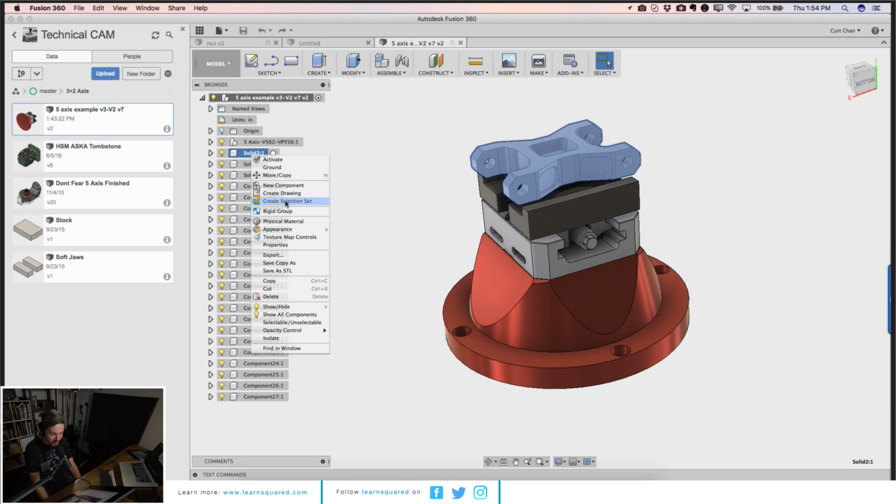I'm gonna have a question too. Which we can do STL. So all it is, you can do mesh preview and refinement options. Not too much, but that's all we can really get to today for exporting.

I have actually a question in terms of... I use Moi for translating the geo, usually to save to STL, I go to Moment of Inspiration. That has a really good exporter. So if you're looking for that right now while Fusion's getting that stuff set up, that's a good alternative. But eventually I'm sure you guys are working on it, and then we'll have like a sick topology suite so we could bring it into our Sub-D modeling and do pointless things.

Like make stupid guns and stuff. One thing you could do is instead of exporting STLs or step files—by the way, if you work in 3ds Max, I'd suggest exporting as a step file because Max is gonna read it, import it as a body object, and you can convert it over there. But I found the most success—and I'm gonna try it a couple more times to confirm—exporting it from the cloud as OBJ. That's usually getting you much cleaner results from the meshes than if you'd do it through Fusion 360.

I don't know why there's a slight difference there, maybe it's a bug or something, but when you export directly from Fusion 360, some of the surfaces may not align, the vertices aren't going to line up. I found that when you're exporting from the cloud, it's usually working really, really well. So all the translation is done there. Yep, I agree, that's probably one of the ways of doing it.

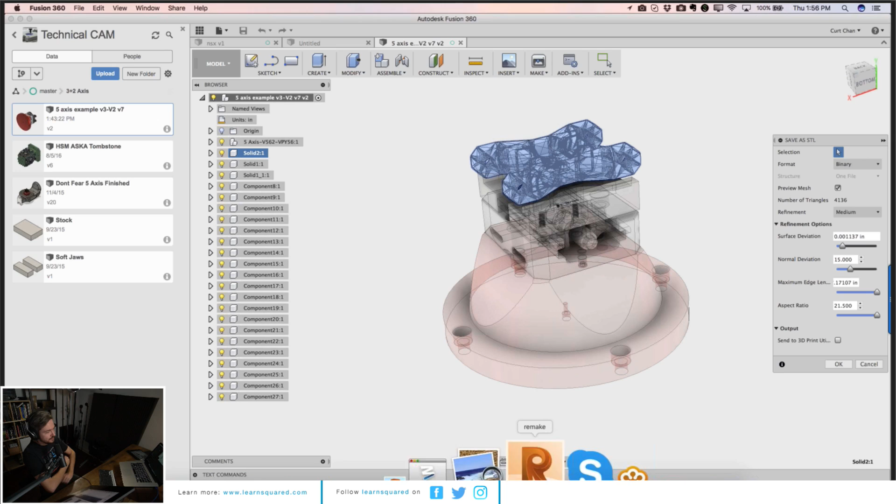What's your workflow like, Maciej, when you're making stuff to go back into a polygonal render in V-Ray or Octane? I would just import it—in most cases I just export a step file or IGS and put it in Max, and Max can read that stuff, convert it to editable poly. But again, it's not going to be the cleanest way, unless you're not changing anything to the model as you're importing it, then it should be fine.

Unless you want to go in really close, almost like macro shots that might reveal some problems, then I would not change it to editable poly. I would just leave it as a body object, which is kind of heavier but still sort of solid, and work it that way. You can also export a high density mesh and put it in ZBrush and clean up over there too, that works too.

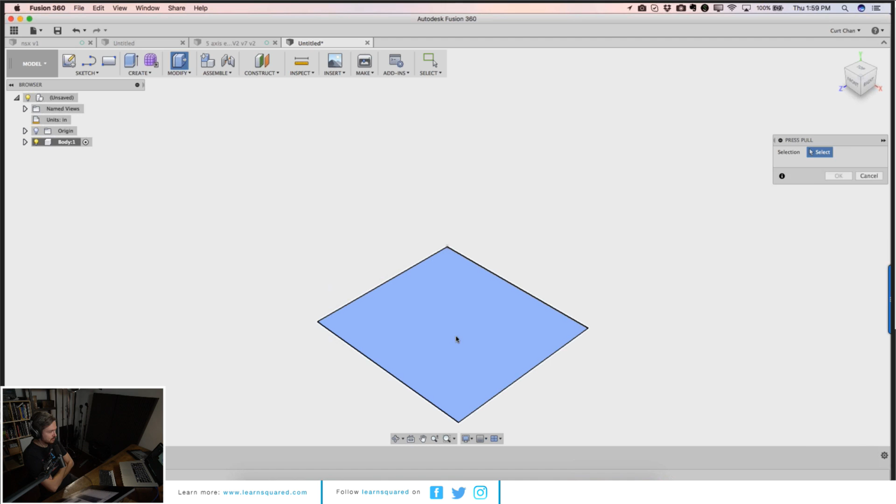So now as I start designing, for example, if I just make something stupid, right, that's going to be a body of something. Let's do Q for press pull. Let's pull this up. Let's do sketch. Let's just start creating, O for offset. Let's bring this stuff in, and then Q, and then let's start just creating some stupid shit here, right? This is part of my body.

So now you look at it, right? Body. That's what that body is. I'm going to come back up to my top level. Let me go and just save this guy off. Okay, let's go to my sandbox up in this sucker.

Right. Robot. There. Robot. Damn. Secretly working with Vitaly, creating Skynet? Is that what's up? Skynet. Vitaly changed his first name to Skynet. Skynet Bulgarov. Skynet Bulgarov.

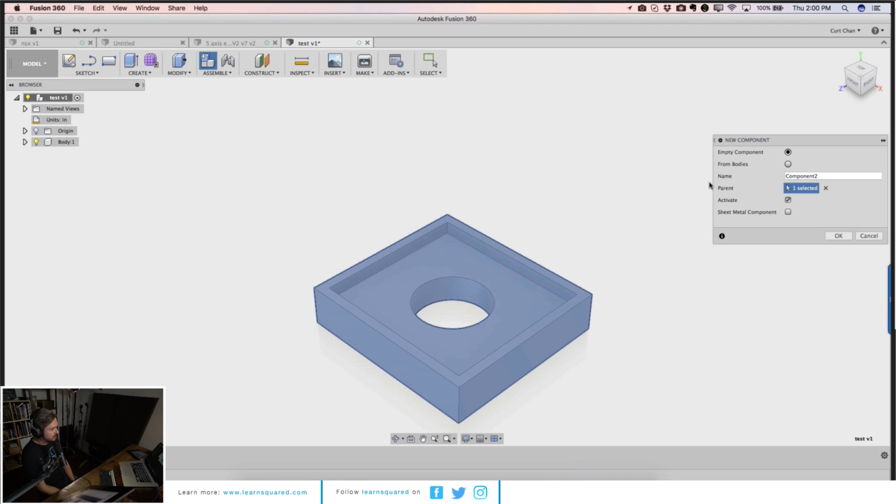Awesome. So now, since I have this body, I can come back up, activate this top level, for example. Now, the situation here, give this a little second, come on. Activate. Now that's the top level. Now I can say create a new component. This can be my empty component. And then this now becomes a shadow, but now I can actually start taking the geometry and now creating my components this way off of things, right?

So just to kind of show you my workflow of, as I start taking an assembly, I'm now going off and just working down this whole phase of body, shaft. It's all a part of the test.

So aggressive. Where's the lube button on that thing?

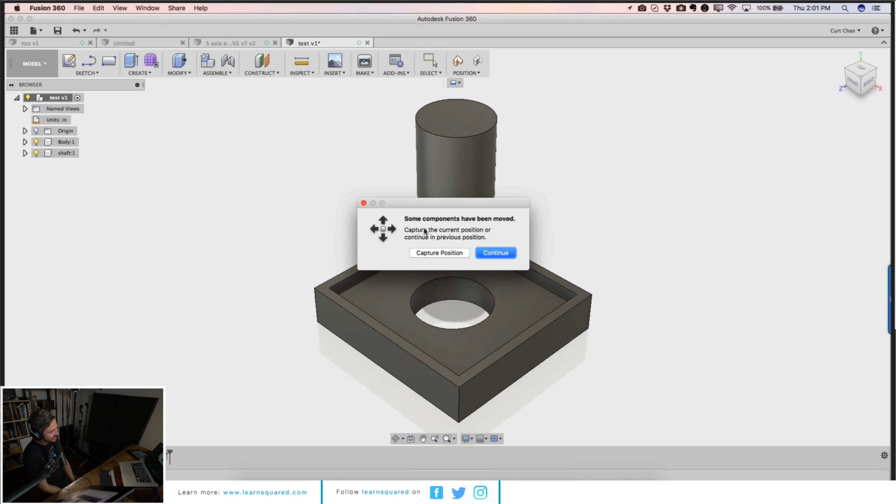It's all a part of the setup, right? Adding relationships. So this is component 1 to component 2. Oh, right. Whoa. You see it shaking? It couldn't even go all the way. It just started to delete. Like, get out of here! Like, exit only. So there's a relationship now.

I hope your colleagues see this, Curt. Dirty bird. I like how you just subconsciously, naturally made this whole thing. It's just, freak nasty.

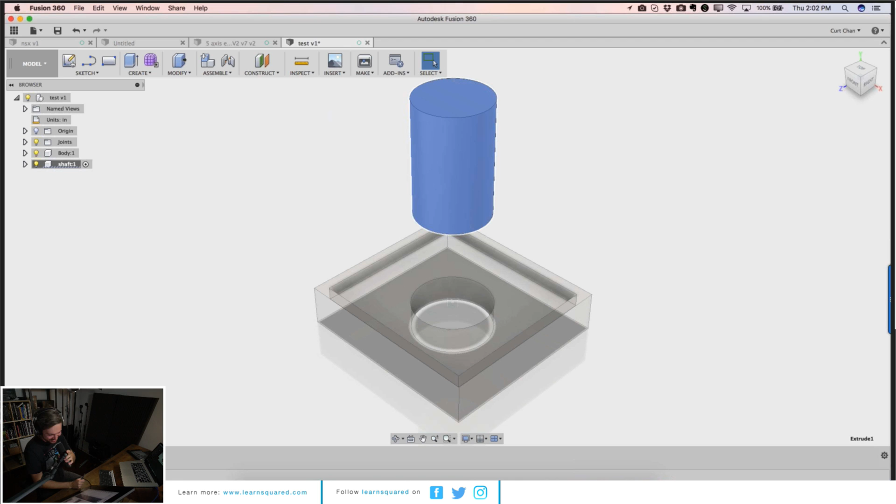But at least you guys can see, though, right? Yes. Technique, right? Top level assembly, body, shaft. If I want to edit this shaft, so this is kind of the cool part. If you look at it here, see my entire tree. If I activate the shaft here, it's only going to show me the history just for that component right there. So it's a great way to organize and backtrack and say, okay, well now I want to go make changes just to this guy. Now I can edit the sketch.

Oh, nice. If I want, I have this history here. Let's go with 3 or so right here, depending on how big it's going to be. 1, right? Stop the sketch, right? So it just depends, let's edit the feature now, how we want. What's that sketch? There it is, right there. That's cool. Right. So now we'll come back up to that level, activate, boom.

So generally, you would work with components, right? Components are, if you have more than one part, always going to start with a new component every time. So each part will be a component. Cool. Then you can work with pretty big projects and files. Yeah. Because then it will only lag if you have them all active, basically, to view. Then you can turn them off. Is that what you're getting at? Yeah. Agree. Okay. That's cool.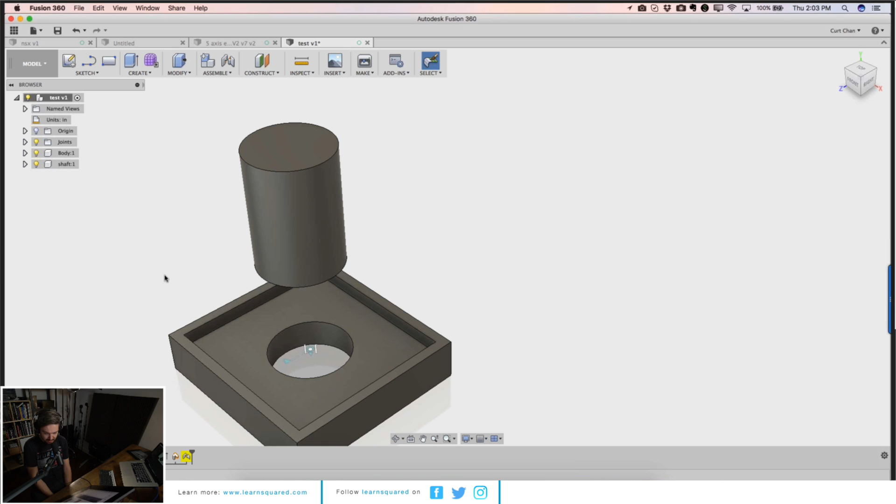All right. Well, what else is new? What else is new? Are there any questions? There's actually a couple questions. Yeah, let's do this. Quiet down, people. Let's jump to questions. Shut up, Ash. Shut up. Gotcha.

One of them is just about: is it possible to free draw, to line draw free to the camera view, or are your lines always restricted to planes, XYZ planes? Yep, restricted to XYZ planes. Okay. And the second question is: are there any updates concerning the snapping and tracking as you would find it in Rhino or Moi, for like surface and body intersections, near perpendicular curve normals, etc.? Yep.

And I think when we have Colin Smith on here, he'll definitely shed some more light on the direction of development of what we're doing for a lot of the sub-D modeling, surface modeling, mesh stuff as well, because he manages all that stuff and can give you the lay of the land of where the product is going for that side. Awesome.

Yep. It's definitely killer. Cool. Yeah, that'd be awesome too, just to know a little bit more on that stuff. Yeah, totally. I'm gonna shoot out an email to him and we'll get him on the next round.

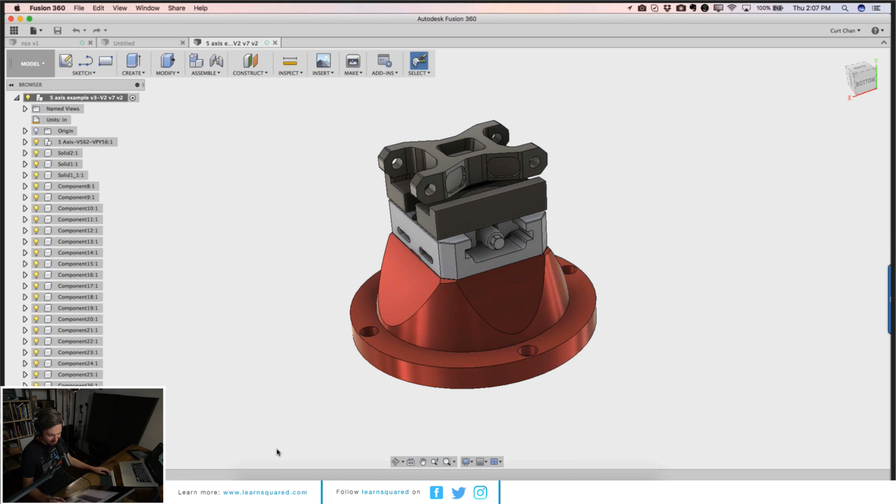Maciej, you want to make me presenter? I could show him some stuff. Right. Let's see. Where is the hotness? Show my screen. All right. Ooh. Wow. The guac in the shell. Those ghost nuggets. Okay, let's let this baby load up.

So there's this button that nobody knows about. It's hidden on the lower left side. You have to open up the monitor, and it's a badass button. So, yeah, the joke didn't work. Where's this badass button?

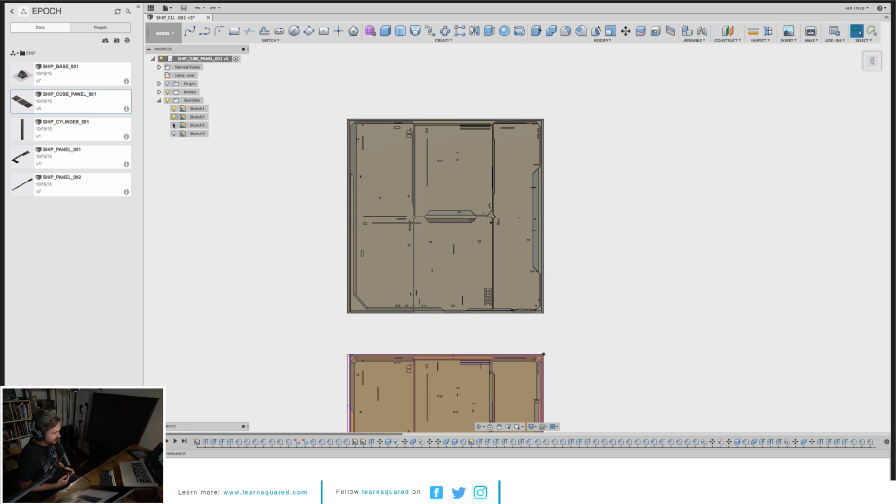So anyways, basically I made a bunch of sketches for each panel. Each one of these is isolated in their own piece, and I'd make that and then move them along, and basically had like a rapid prototype off of one sketch that I would be able to do different extrusions to. Nice. And then bring that in, and it worked really quite well.

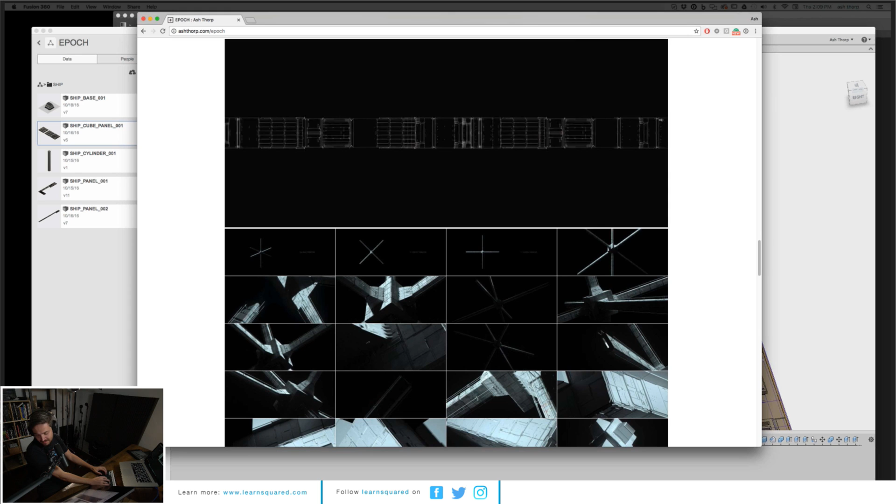Let me go to the website. Okay, so we go to Epoch, and then we could look at the ship. I think there's a couple screenshots in here because I wanted to show what I was using. So here are some of the early sketches I did in Photoshop, and that's some of the stuff compiled into Cinema. Here's some of the cuts. Dude, that's awesome, man. Quickly making some extrusions, but being able to take all that, put it all together and then texturing it.

Nice. Yeah, it was a pain in the ass, but it was cool. It was a good learning experience. But you can see it. That's what I was going to try and show you. You can see this right here. No, that's awesome, dude. Panel, and then to cut down on the heaviness of it, we instanced each panel because it's all reflected. It's a reflection of one another. So once you make one side, you just instance it and then you rotate it and stuff.

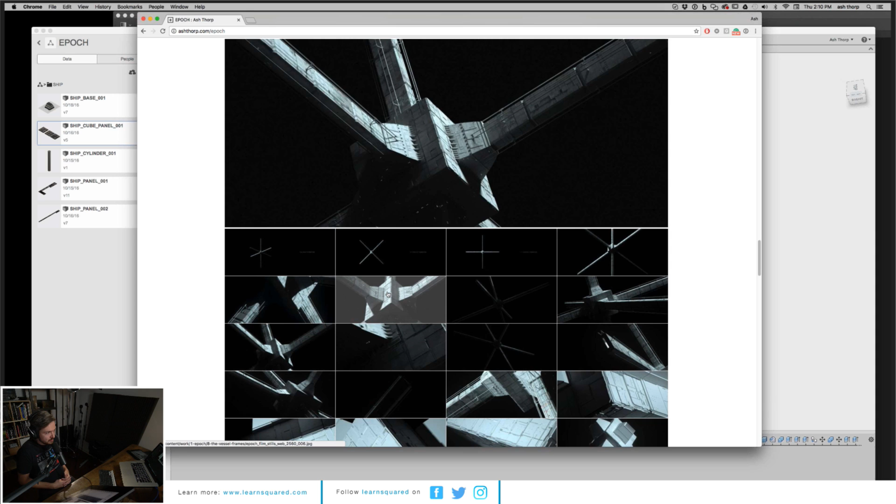I think we did it on 2 sections so that... Did you render instances or just regular instances? Through Cinema, we rendered instances. So when it would use the RAM, it was only using one section. Yeah. Nice. So it would load faster and stuff. Because we had 16,115 frames or something to do for the film, so a big part of it was using the ship and stuff too.

But it got quite messy too, trying to figure out how to retopologize and all that stuff, and the UV mesh and all that stuff. It was quite crazy. So it was an interesting workflow trying to figure it out and making it work. But still going at it. But I still haven't found anything yet that beats being able to rapidly make hard surface stuff. This is the jam. This is the best. It's the good stuff.

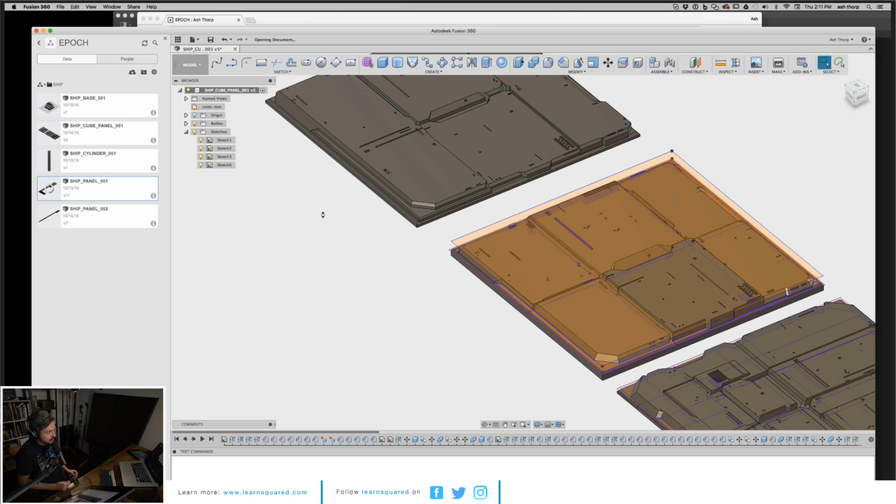Let's see if this one works too. The goal was to make a shit ton of panels and go crazy. But then I ran out of RAM, so I was like, oh, I can't do that. So I started making stuff like this.

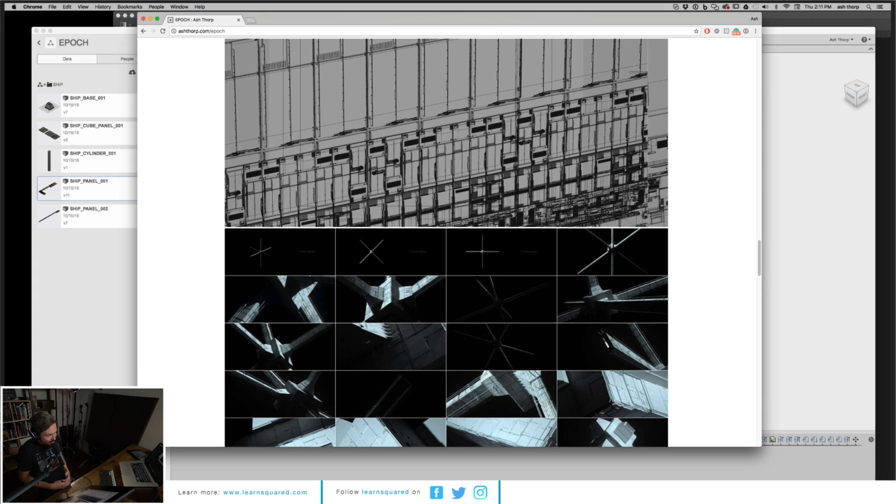Because you're using your fucking Mac. That's why. No. Using my PC. Your PC? Curtis, are you still here? I am here. I'm just enjoying the show. Why are you here? No, deal with this.

But yeah, here's all the sketches and stuff. And this is really primitive stuff, simple things. But I feel like simple tricks done well, they always work well. So, hey.

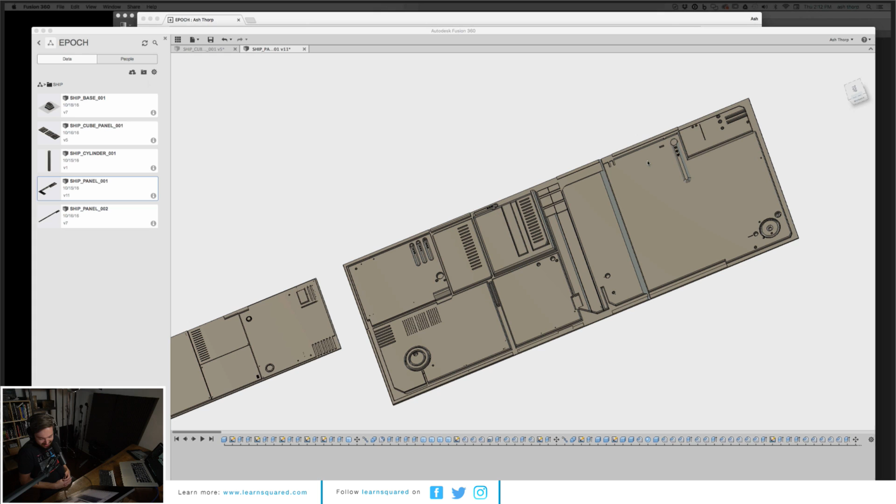Actually, I want to see, Maciej, what you got going on. What kind of cool things are you doing with this software right now? Show us. I can't. Just show us. No. Yeah, I use a Mac. People are hating on me because I use a Mac. I use both. Everybody uses both because they're both great and bad at the same time. I'll show what I did in it when the time comes, which means Ghost in the Shell. Because the majority of work that I do in Fusion is work related, so I cannot show shit. Boo. It's all right.

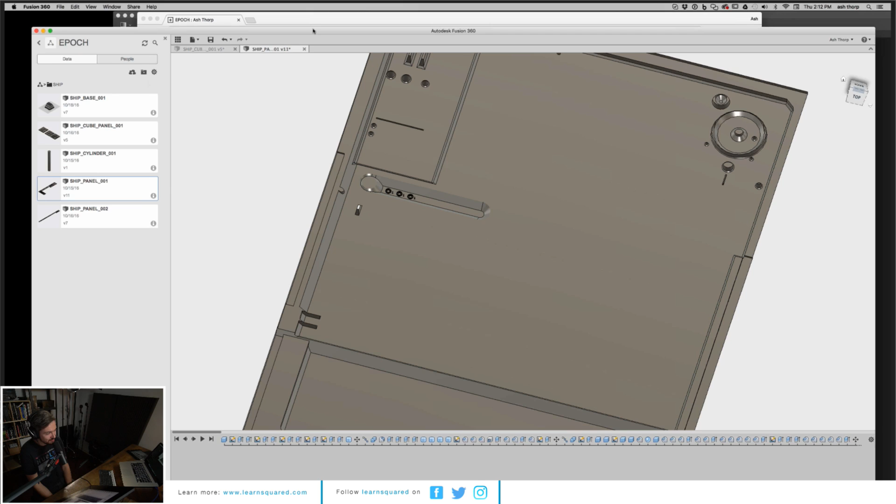All right, guys, let's wrap it up. What? No, let's go. Let's do a marathon run, 17 hours, Joe Rogan style. Good stuff. Getting my second PC repaired, so I'm gonna get back to my 8 GPUs very soon. I have 6. Vitaly now has 7, and now you have 8. Oh no! I always had 8. Just my computer crapped itself, so I couldn't use them all. I'm using 4 right now, which is kind of a bummer. You're pathetic, dude. 4 1080s fucking sucks. But 8 1080s, yeah. It never gets old.